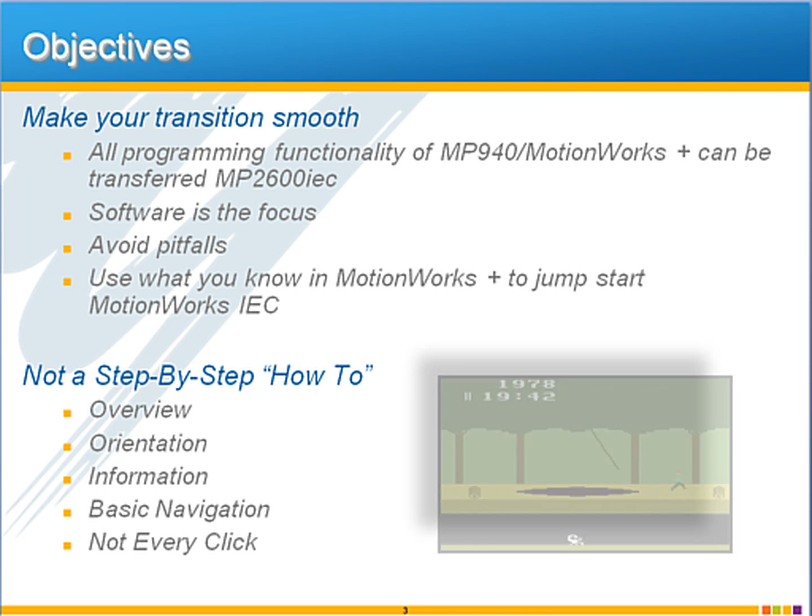So it's my goal in this e-learning video to bring these topics to your attention so that you, as the OEM or end user especially, can quickly come up to speed on Yaskawa's new IEC controller platform. What I want to do is help you avoid the pitfalls and alert you of some of the programming differences and details. And I want to help you use what you already know about MotionWorks Plus and the MP940 to give you a head start with the IEC platform.

One thing you'll see that this e-learning video is not intended to be is a step-by-step how-to video like many of our other ELVs are. We want this to be an overview of the topics, giving you simply an orientation to the specific areas of attention when converting from MP940 to MP2600 IEC. So I hope that you find it informative, and I will be showing some basic navigation but not explaining every single click.

Now, before diving into the material, I would like to just outline the sections of this training, which you can also see reflected in the navigation panel at the left. I'll cover some general programming concepts, followed by configuration, homing, indexing, camming, and networking. And I'm not going to take the time to cover every single property of every single MotionWorks Plus block, as really this e-learning video is not intended to be an exhaustive reference. I will instead use examples in each of these sections to illustrate the major concepts.

So let's begin. A general comparison of the programming concept I think is a good place to start. You'll see that there are many similarities and several differences in the instruction set, the programming method, variables, system variables, startup tasks, programs, and subroutines.

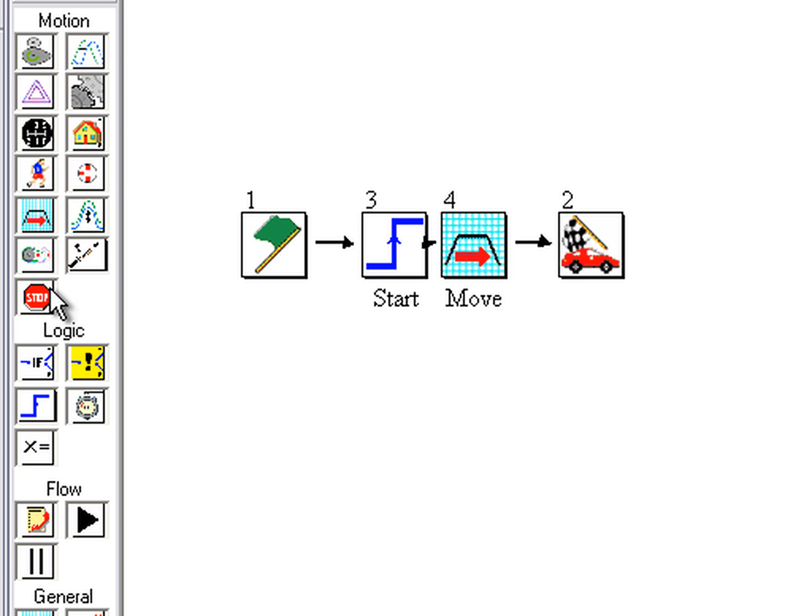First, let's look at the instruction set. Your programming tools are generally the same in both environments. Here in the MP940, you have your list of commands, and of course each of those have their properties. And in MotionWorks IEC, you also have the list of commands. The difference is that in MotionWorks Plus, this set of commands is specific for Yaskawa, but in MotionWorks IEC, the instruction set follows the international programming standard of IEC 61131 and PLC Open.

And part of this standard is that we don't have the properties as you'd have in different blocks in MotionWorks Plus with the properties area. Instead, you have the inputs as the properties, basically visible right on the block itself. The blocks in MotionWorks Plus typically have one input and one output, sometimes two outputs. And the equivalent for that in MotionWorks IEC is the execute and done input. You'll pretty much always see an execute in most of the blocks. Block calculations, status, and diagnostic information is also given in these outputs of the block.

As the program runs, you can monitor the state of both the inputs and outputs right on the code page, and you don't have to have a separate monitoring program and monitor it by block number as you did with the MotionWorks Plus environment.

In MotionWorks Plus, you'd connect the blocks in the sequence that you wanted them to run. The same is true with IEC, but IEC gives you a lot more flexibility. You don't have to connect the blocks together to sequence them, as they'll also be executed on the page from top to bottom and left to right.

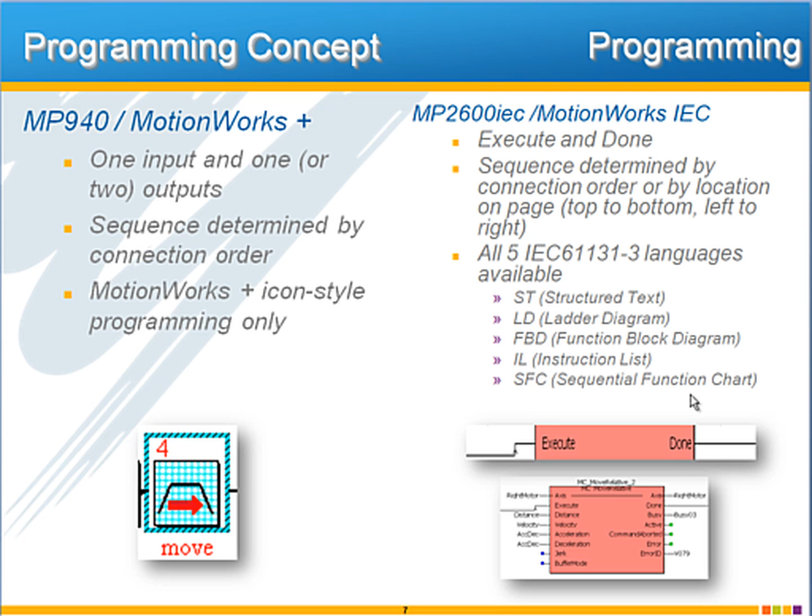In MotionWorks Plus, did you ever have to make a complex network of if blocks in order to accomplish what you know you could have done in ladder with just a few rungs? Well, in MotionWorks IEC, you can combine the best attributes of all of the major types of programming languages. You can use ladder, function blocks, structured text, instruction list, and even sequential function chart, which is like a top-level flowchart language. In all, there are 5 programming languages available, and you as the programmer can choose which language to use for each program worksheet.

Variables are another area where the MP2600iec expands functionality. In MotionWorks Plus, every variable you made was a global variable, but the MP2600iec supports both global and local. If you're creating a function block, you can also have input and output variables. Global variables mean that once you name a variable, that name refers to the same variable everywhere in the entire project. This may be the way you want the variables to work, but it is a programming limitation.

Here's an example. Let's say you want to reuse a section of your program, and it should run independently of the original. With global variables, you would copy, paste, and then have to manually go in and change all the variable names, which can make it very difficult then to reuse your code.

When you have local variables, you copy the code and the variables from one program page to another, and the variables retain their names, but still operate independently. There's then no name changing required. This is one of the major goals of IEC programming, which is code reusability.

Additionally, when defining a variable in MotionWorks Plus, you may remember that you had the 4 data type selections: bit, integer, long, and float. Now the IEC standard has these as well, just uses slightly different names here: bool, int, dint for double integer, and real.

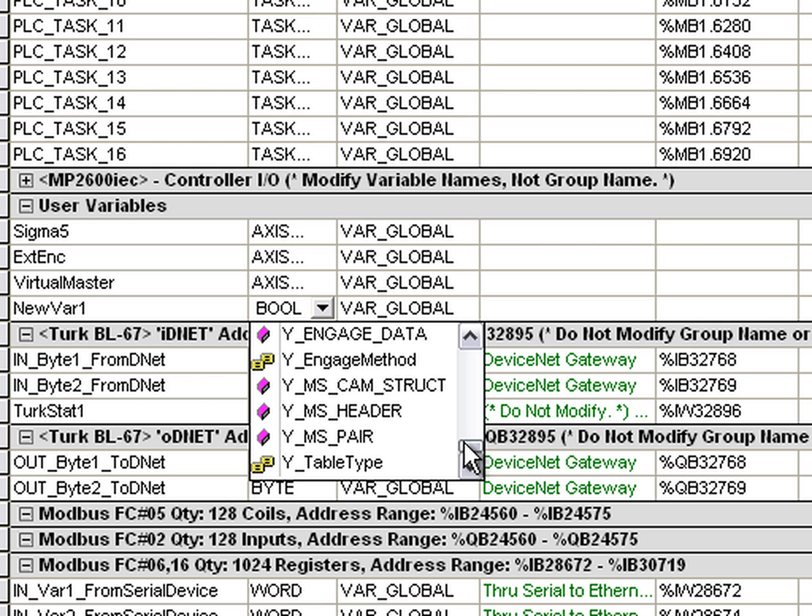You can see that here in a variable list. If you look at your variable list, there's also a type, and the list goes on and on. Very many data types, which is one of the hallmarks of IEC 61131-3, and we call it strong data typing. It really just means that variables of different data types will then not mix unless the programmer converts them to the same data type.

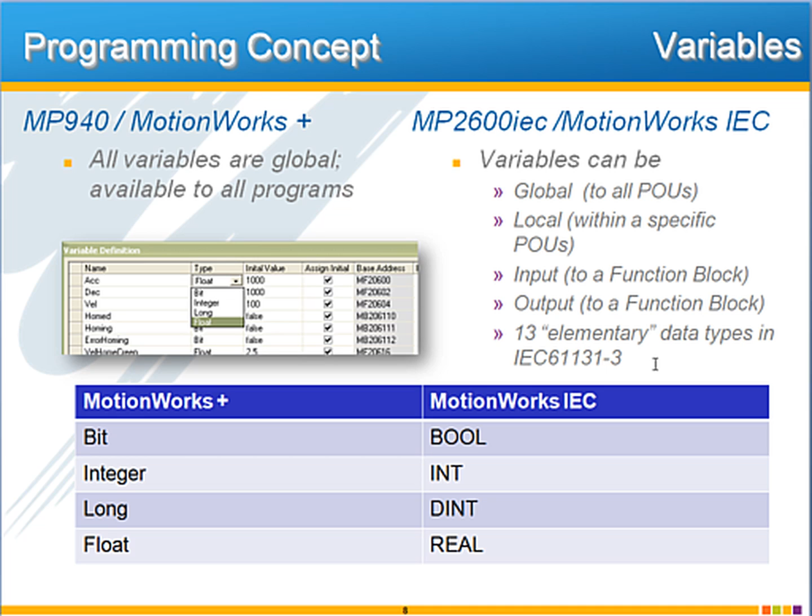There are 13 elementary data types, and you can make your own data types, which is how you create structures, arrays, or enumerated types. Continuing on with variables, let's discuss the MP940 system variables.

These are prefixed with the S for setting, and if you look down here, some of them are M for monitoring, and contain a lot of important different information such as error levels and feedback data. The MP2600iec employs this same concept, but instead we use the PLC Open term parameters instead of system variables, and each parameter then has a number associated with it.

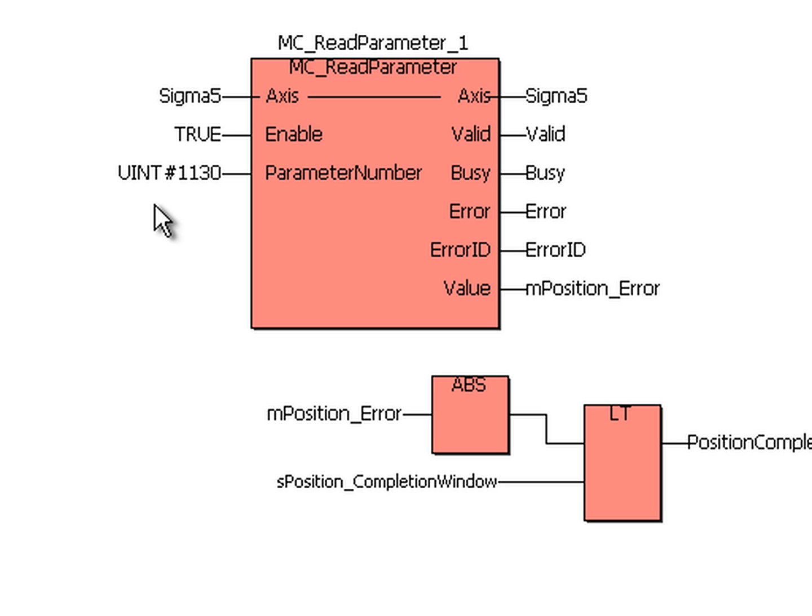So to use this information in your code, you use this block called MC read parameter or write parameter to set. That's how you would deal with this type of important system information.

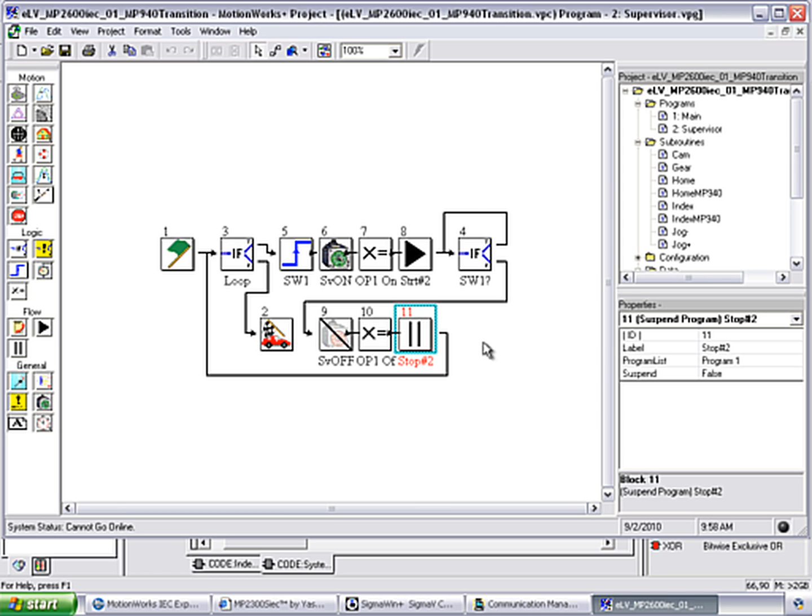Now that we've discussed programming, let's look at how the programs run in the hardware. In the MP940, each program has an auto start property. Then typically the programs with the auto start would stop and start other programs in the code using the play and pause icons. Now this fundamental concept is different in the MP2600iec.

Now that doesn't mean that you have to run every block of every part of the code all the time. It just means that you can use conditions such as if and jump statements to make different variables true and false at different times so that the blocks run when they're supposed to.

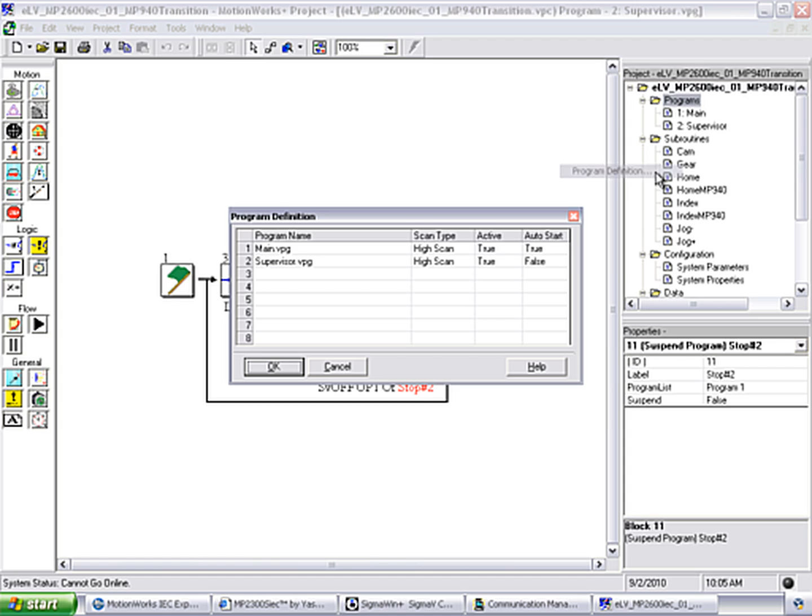And there's really more to the story of controller architecture, which has to do with the tasks in which the programs run and are executed by the controller. In MotionWorks Plus, each program scan type is assigned to either high scan or low scan.

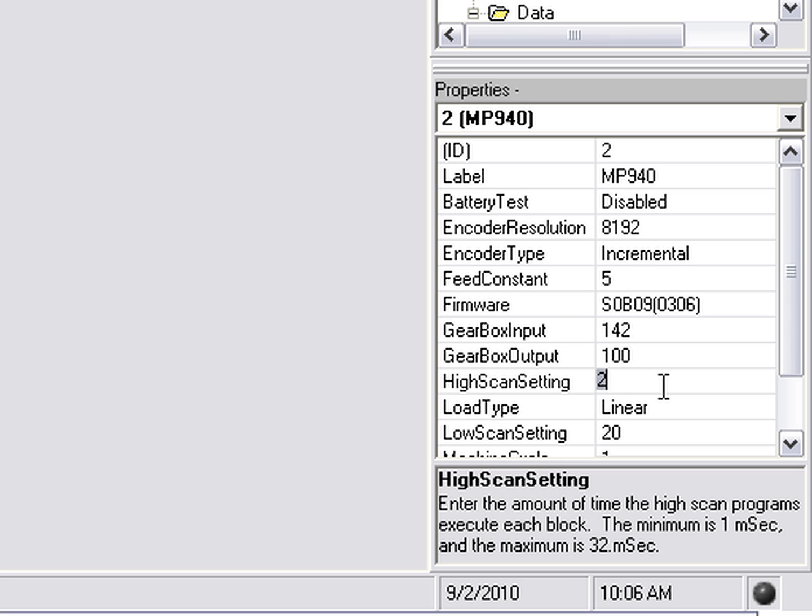These are the only two tasks available in the MP940, low scan and high scan, and the task update rate is set here in the system properties. But the MP2600 IEC follows the IEC 61131-3 definition, which is more powerful and flexible.

This allows up to 16 tasks using the Pro version, as I've got here. I don't have 16, I have 6 tasks at this point. Each program is assigned to a specific task in the hardware tree, and you can have different update rates for each task. This one's 100 milliseconds, this one is 80 milliseconds, this one is 50 milliseconds.

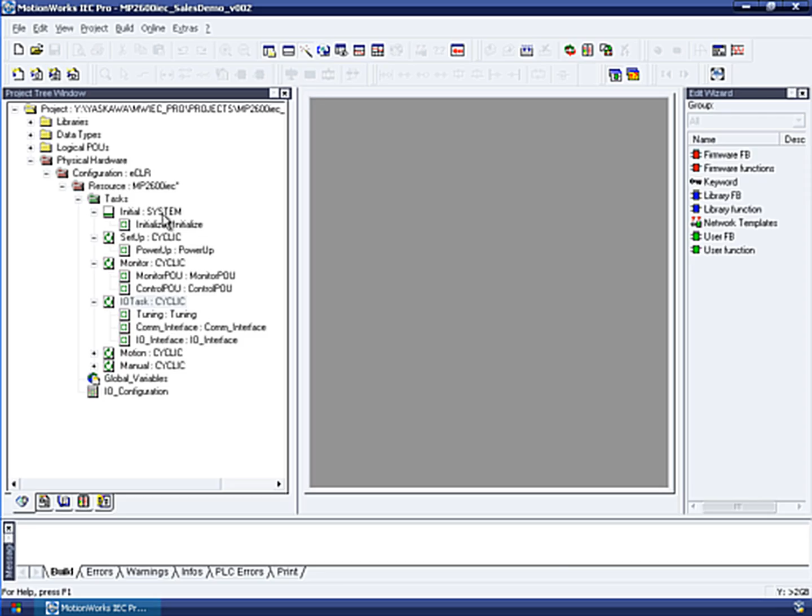So very similar here to the high scan and low scan, but you have basically high, low, and everything in between. This model also allows for special tasks that run just once, like this initial system task, which is set in this case to warm start, basically a power up, so that you can have system data initialized right when the controller turns on.

We have a lot more information about MotionWorks IEC Pro and task assignment and how to do all that in the MotionWorks IEC Pro e-learning module available on our website.

So as the programs are running, each in their tasks, what if there's another code page that needs to be executed at that time? This in MotionWorks Plus is called the subroutine. Subroutines are basically just program pages that run only when called by another program or another subroutine. In the MP940, you have to be sure, as we've done here, to call them only one at a time. Basically a subroutine is a way to organize your code from one page into another so that you don't have all of your code on one huge page.

You would never call the same subroutine more than once, since the data would become corrupt. This is because subroutines work with all of the data, all of the global variables, with all of the current values.

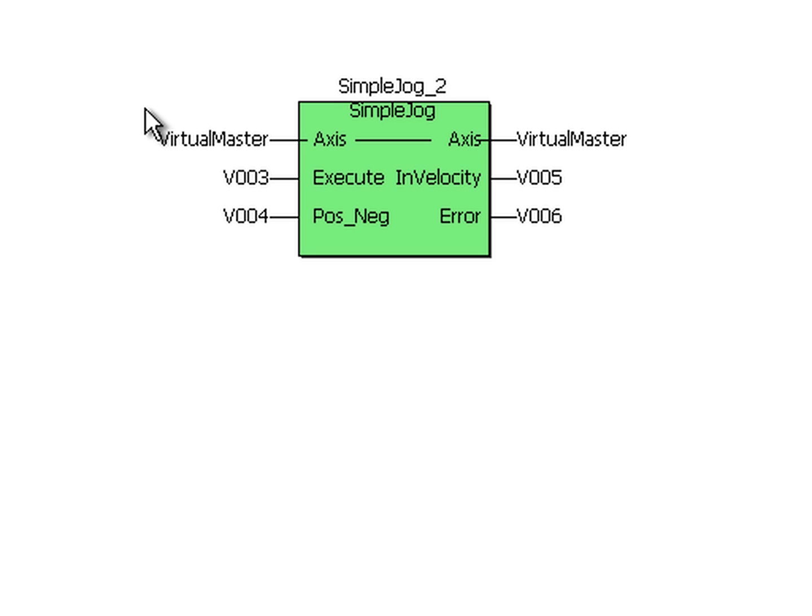In the MP2600 IEC, we don't use subroutines, instead we use function blocks. Remember, all of the program POUs are running all the time anyway. So when there's a specific page of code to run at a specific time, here I've got this function block called simple jog. I can double click on it and inside you see the code for it.

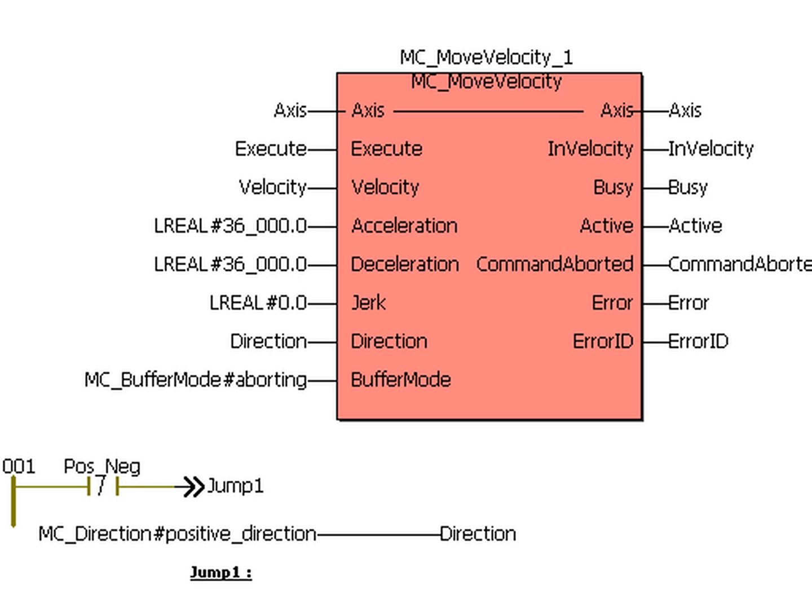One nice thing about function blocks is that you can execute them simultaneously by any of the program POUs that are running, because they don't share the same data space like the subroutine does. This is one of the most powerful features of the IEC programming platform, the ability to make function blocks based on function blocks to higher and higher programming levels.

This allows you to reuse your code without having to go through and rename variables and make other code changes. So as an example here, I can add this function block that I made called simple jog over and over again without worrying about calling it more than once like a subroutine.

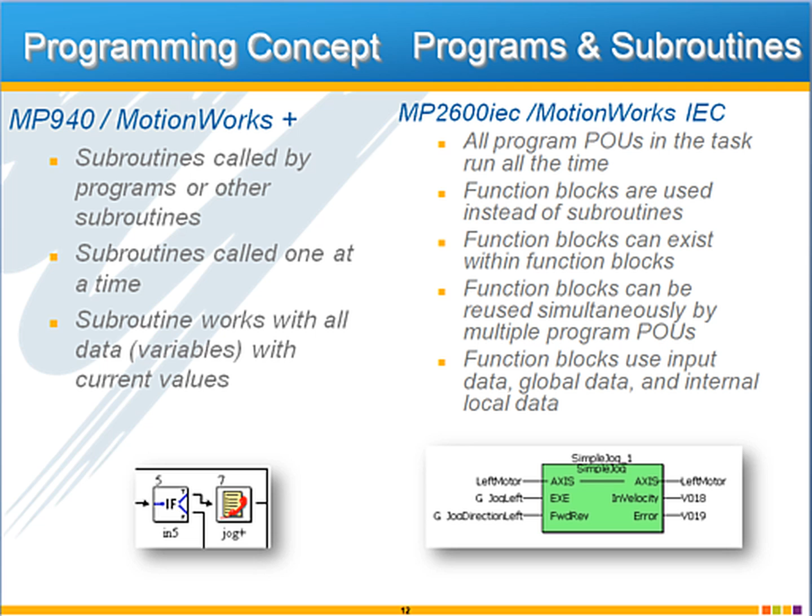That's exactly why they give different titles at the very top, 1, 2, and 3. The point is, once you have made a working function block, you just keep plopping it down wherever you need it in your program as if it were any other instruction, and the function blocks that you make in one project are very easily accessible by another project, so there's really no reworking what's already been done.

Now that you've seen some of the general differences, let's look more specifically at the configuration. Configuration means the hardware settings, such as user units, servo parameters, and network devices. This configuration is likely to be for you the first area to consider when you're converting an MP940 MotionWorks Plus application over to MP2600 IEC.

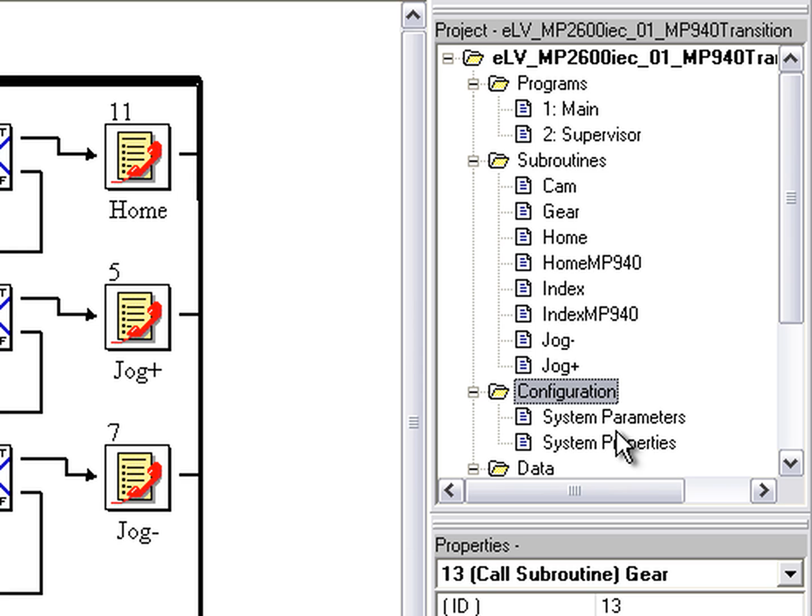The MP940 project contains the configuration folder with the system parameters and system properties. Let me just remind you where that is: the configuration folder, system parameters, and system properties. I'll start with the most basic of these, the system properties. The equivalent of the system properties in the MP2600 IEC is the hardware configuration.

That's this MWCT button. Now this MotionWorks IEC hardware configuration is a separate window where you define basically all the same information that you would have seen in MotionWorks Plus system properties. The basic navigation difference was that in MotionWorks Plus we had different buttons, each with their properties. In the bottom right, we use a more modern tree structure here at the left for the different devices in MotionWorks IEC.

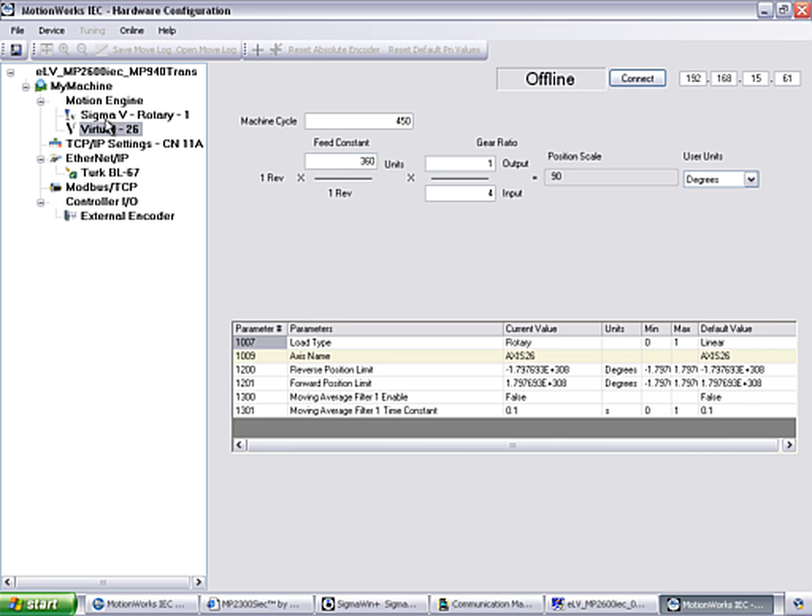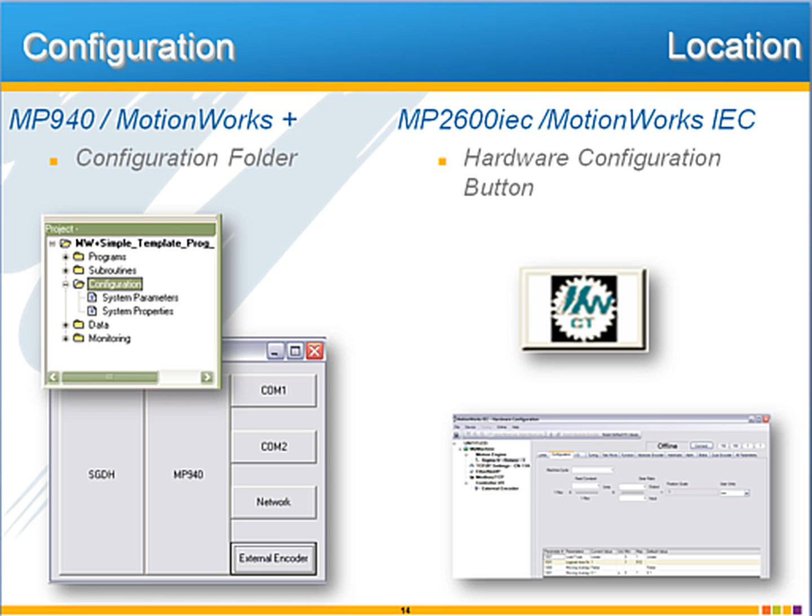So let me take some time now to look at each of these different sections and relate them from MotionWorks Plus over to MotionWorks IEC, and hopefully help you avoid any pitfalls.

So the first area is the SGDH, or the Servo Pack System Properties. This is where you have all of the parameters of the drive, the Servo Pack, listed numerically. The equivalent of this in MotionWorks IEC is the Sigma V, and then go to the All Parameters tab at the far right, and you'll see all of the same types of parameters.

Now, many of these SGDH parameters correspond between Sigma 2 and Sigma 5 used in MP2600 IEC, but the most critical ones for your application are going to be the tuning-related parameters. For tuning-related parameters, it makes the most sense, since you have Sigma 5, to use the advanced features of the Sigma 5. Don't just try to transfer those tuning parameters over. You're probably not going to get a very good result.

Now, if you did have a lot of different servo parameter settings in the MP940 system, or you're just not sure, you want to be very sure that you didn't have any other things like torque limits or other settings, and you want to see what they are, you might want to try using the Sigma Win Plus parameter converter.

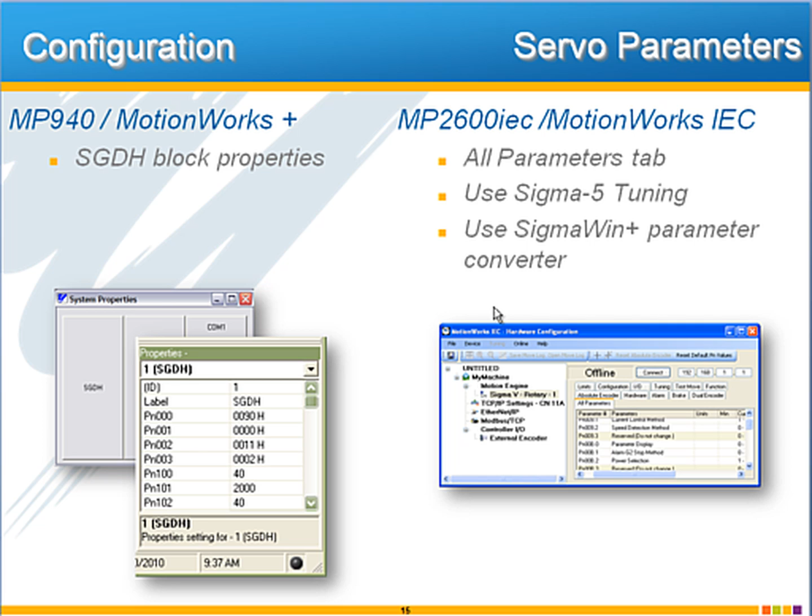So basically what you do with Sigma Win Plus is connect the serial cable to the SGDH, pull out the parameters, save them to a file, and then under this parameter converter menu, you can go find that file. I've got a sample one here, and give it something to save it as. Hit convert, and then it will show you parameter by parameter the conversion and give you a little key here for which ones are different, which ones don't apply, by the color key here.

So you can look at those one by one and decide if you really need to address that parameter, what that parameter is. There's probably going to be many parameters that haven't been changed and that you don't need to worry about, or tuning parameters that you should not try to convert from Sigma 2 to Sigma 5.

Moving on now to the MP940 properties in MotionWorks Plus. That consisted mainly of the mechanical system definition so that you could program the natural units or user units.

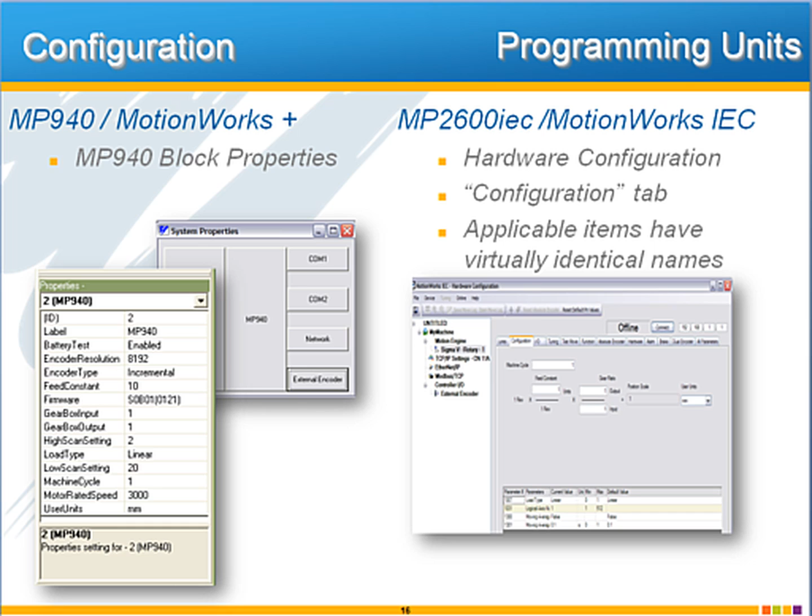MotionWorks IEC uses the hardware configuration tab. So here in the configuration tab, you'll find the exact same machine cycle, feed constant, gear ratio, user units, load type. And our development team has tried to be sure that we named these the same as they were in the MP940 with MotionWorks Plus.

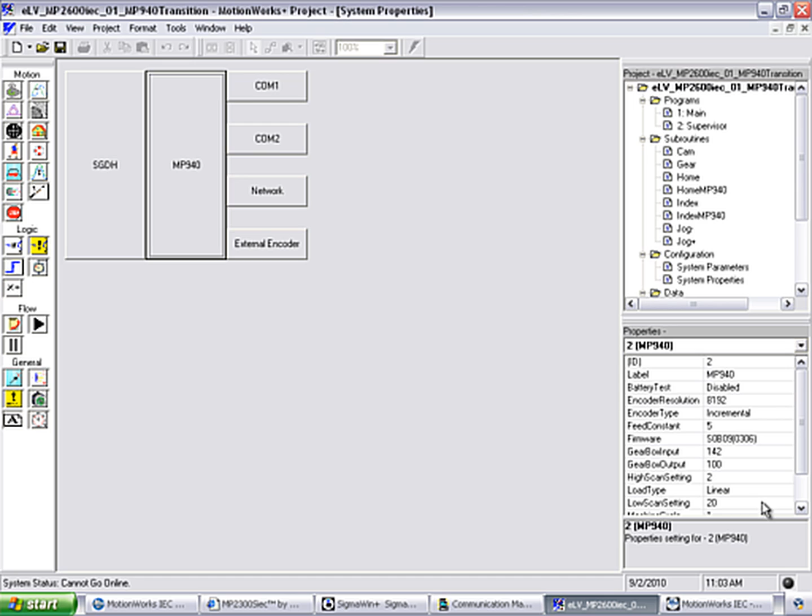So all of these same names basically port directly over, and you can use the same values in the MP2600 IEC project as you had in the MP940.

Now, you will find fewer fields. For example, you're not going to have the encoder resolution, since now in Sigma 5 with the MP2600 IEC we can detect that automatically. But all the rest of them, if you find it in MotionWorks Plus, you can plop it right here into the configuration tab of the Sigma V axis under Motion Engine.

If your MP940 application relied on the serial port, the DeviceNet port, or the Mechatrolink port, then there's going to be some engineering required in this area in order to transition to the MP2600iec. Remember that the MP2600iec exclusively uses the Ethernet port for all of its network communication.

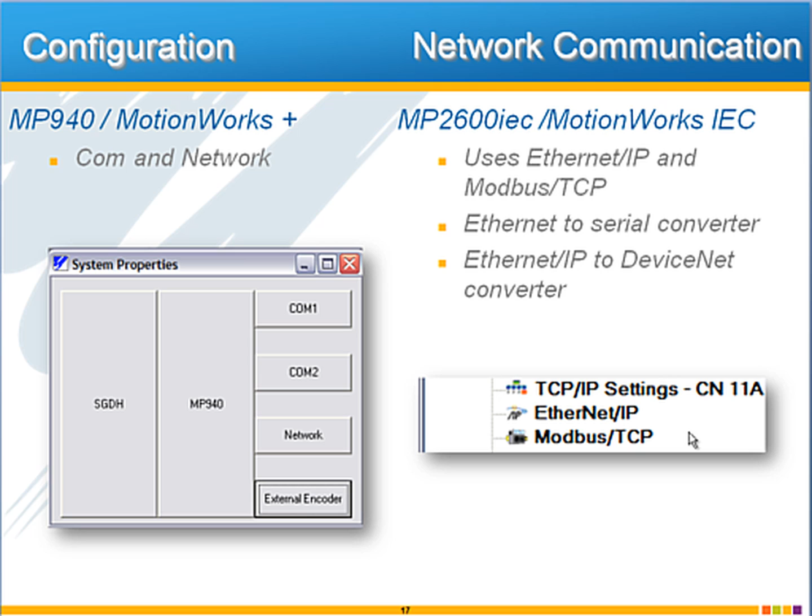So if you can upgrade your network devices to use either Ethernet IP or Modbus TCP or even the OPC protocol, that would be the best option. But if it's not an option, there are third-party conversion devices available, and I'm going to have more on this in the networking section of the e-learning video.

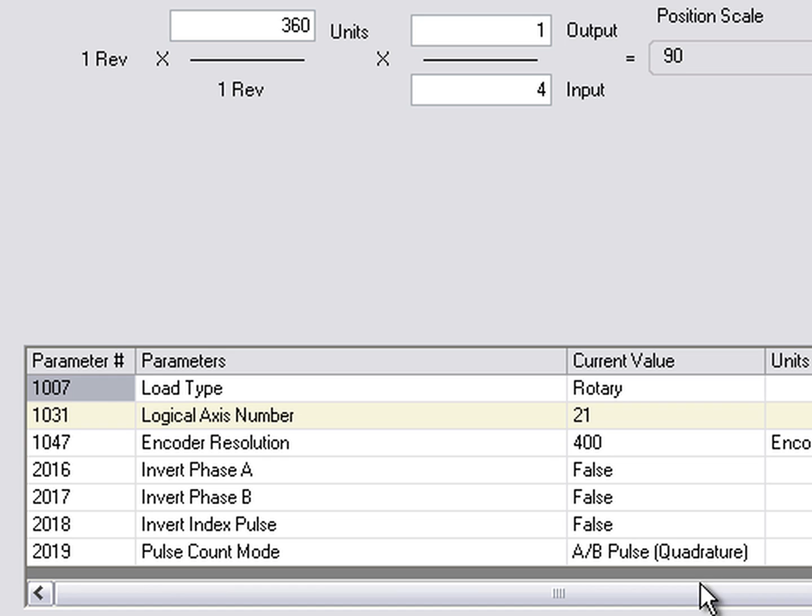The final area in the MotionWorks Plus configuration is the external encoder. MotionWorks IEC basically shows that same information under the external encoder in the hardware tree. So here I go down to controller I/O, external encoder, and you'll see the same type of terms: machine cycle, feed constant, user units, gear ratio, load type. Again, word for word identical to the MotionWorks Plus area under external encoder properties.

The other really important part of the MP940 with MotionWorks Plus configuration was the system parameters. These were just very few, consisting of servo loop gains and limits.

The MP2600iec does have tuning gains, but remember, tuning is not usually required thanks to the advanced Sigma 5 tuningless mode. If you do need to fine-tune the motor, don't transfer the tuning values over, and don't try to set the tuning values manually. Instead, connect SigmaWin Plus and use the auto-tuning sequence on your Sigma 5. So don't use the P gains, don't try to transfer those over to the MP2600iec project.

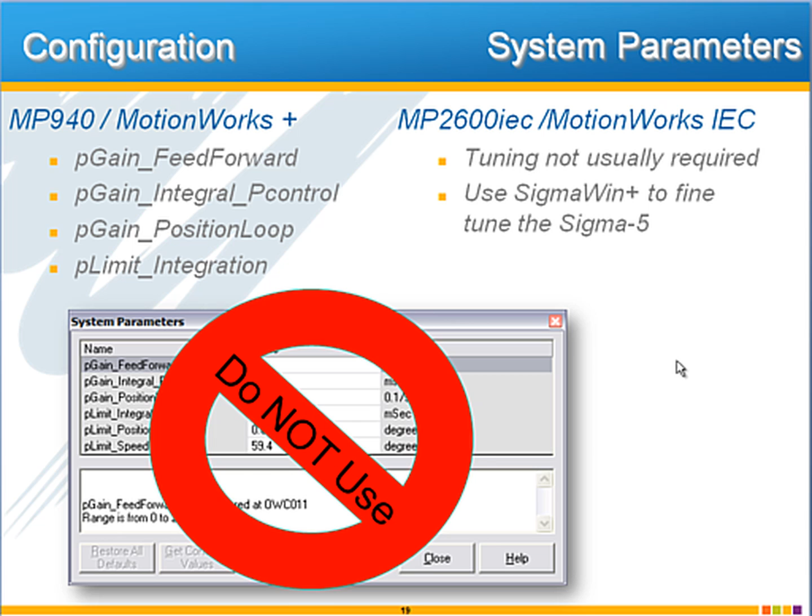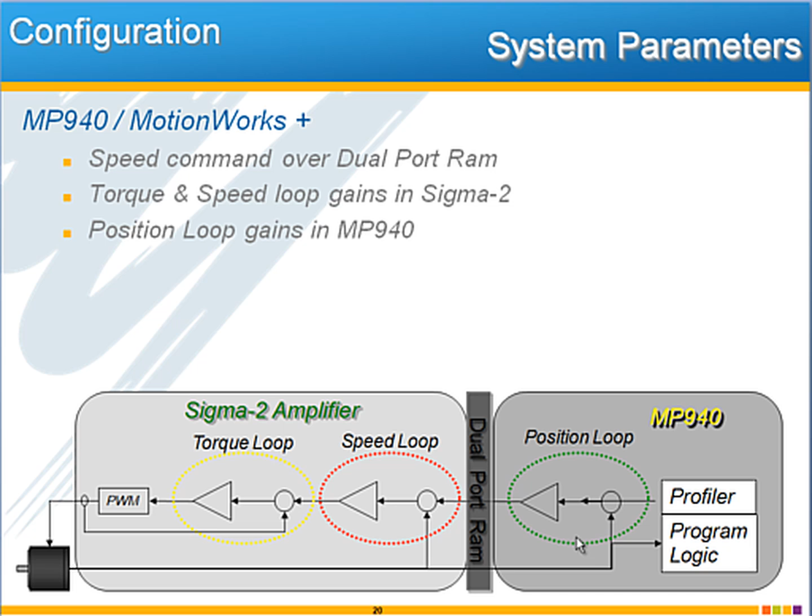This brings up another really important difference in the way these two controllers interface to the amplifier. The MP940 operates by sending a digital speed command over the dual port RAM connection, which means that while the Sigma 2 closes the torque loop and the speed loop, the position loop physically resides in the controller card.

That's why the MP940 controller system had those parameters for position loop proportional, integral, and feed-forward gains. The MP2600iec instead commands position straight from the profiler over dual port RAM into the position loop of the amplifier, so you can see all of the gains physically reside in the amplifier for torque, speed, and position.

What this means is that you can take full advantage of all of those Sigma 5 powerful tuning options. The tuningless mode, advanced auto-tuning, vibration suppression, anti-resonance, all of these are now available when using the MP2600iec. This also means that there are no gains at all in the option card. The profiler position just comes out to the Sigma 5 amplifier, and Sigma 5 takes care of the rest.

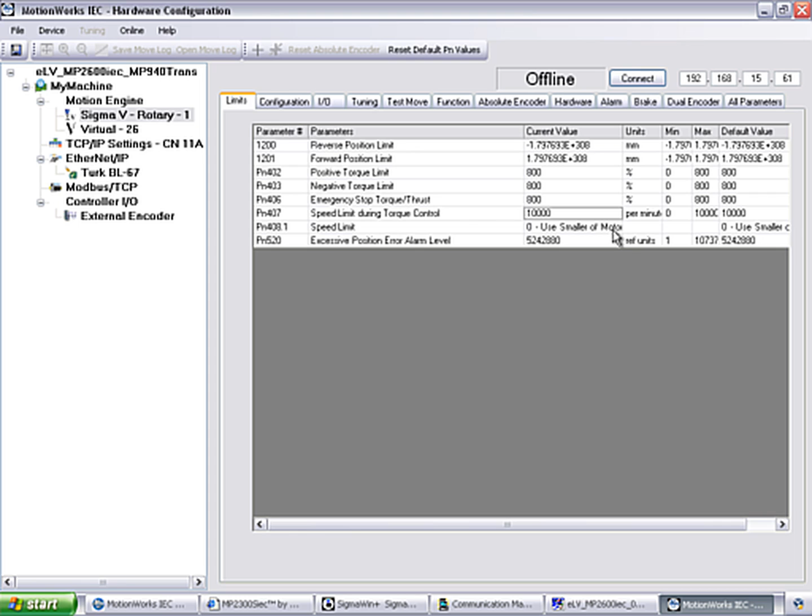Just to finish off the system parameters, there are a couple here: P-limit positioning error and P-limit speed, which aren't exactly tuning related. We do have the equivalent parameter settings in the MP2600 under the Limits tab. So here in the hardware configuration, under your limits, when you set these, please pay close attention to the setting units, because they're not going to be the same as in MotionWorks Plus. Here you've got PN520, the excessive position error alarm level, and PN407, the speed limit during torque control. These are the equivalents in MotionWorks IEC compared to MotionWorks Plus.

Configuration differences in these two platforms affect some fundamentals of the programming concept. The blocks in MotionWorks Plus, with few exceptions, apply only to the main servo axis of the system, the Sigma 2 motor. Gearing and camming in MotionWorks Plus assumed that the external encoder was the master, and the virtual master could be selected with the system variable S external mode, and this virtual master had very little control. Only the acceleration and the speed could be set.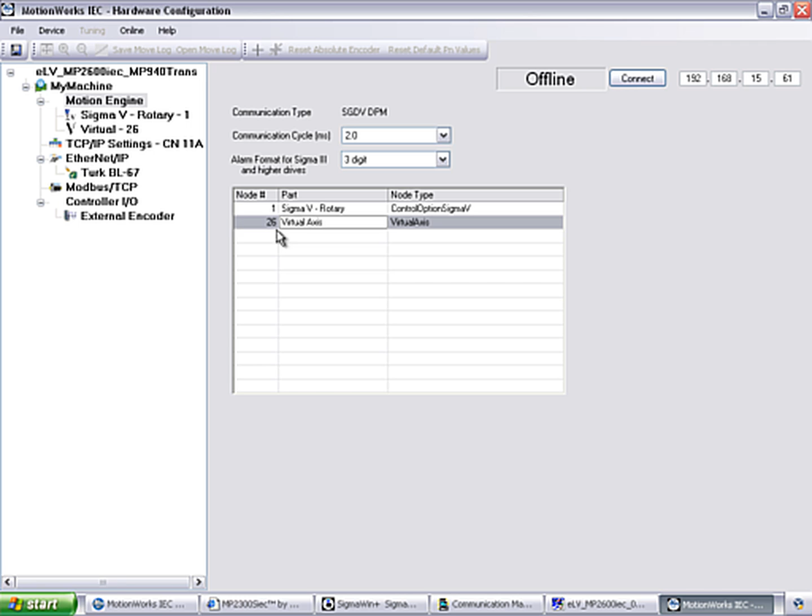In the MP2600iec, the external encoder and virtual master are configured as axes in the system. You can see these here. The motion engine shows the different axes of the system. You have the rotary axis, the virtual axis is another axis, and there's also the external encoder, which exists as another axis. So to differentiate between the different axes, you include an axis number, even on this single axis controller.

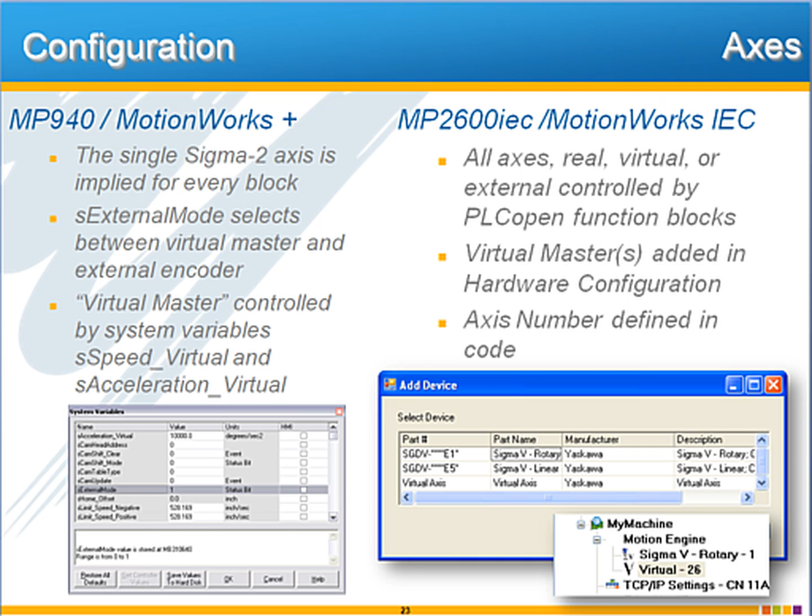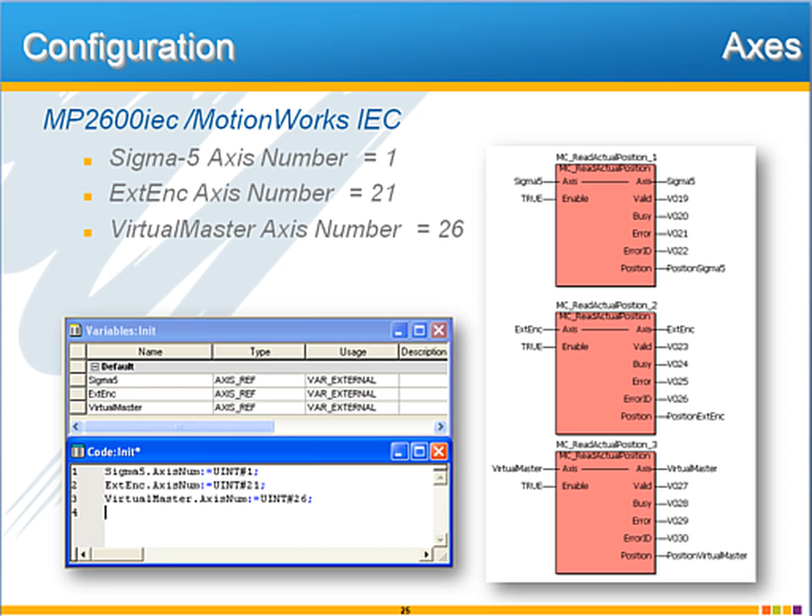This axis number is referred to using a variable with a structure data type called axisRef, just like we show in the Quick Start video. So here, like in the Quick Start video, I've created a separate text program and I define the axis with its corresponding axis number. Typically it will be as in this example: the Sigma 5 is axis 1, the external encoder is axis 21, and the virtual masters are 26 and above if you have more than one.

Once that's set up, you can basically forget about the numbers and just connect the variables: Sigma 5, external encoder, virtual master. For this example, I'm reading the actual position of the Sigma 5 axis, the external encoder axis reading the actual position, and the virtual master reading the actual position.

Homing routines can be as varied as the machines themselves. So I want to compare the homing blocks available in these two systems and then present a simple example of homing to a sensor.

MotionWorks Plus has one type of pre-designed homing available through the home block. The home block moves the axis until a bit, such as an input or other condition, is satisfied, and then continues to move the motor to the index pulse of the encoder. Setting the final position is done through a separate block. If your MP940 based machine required any other type of homing, such as homing to a sensor only, or homing to over-travel sensors, then you would have constructed that customized homing routine block by block.

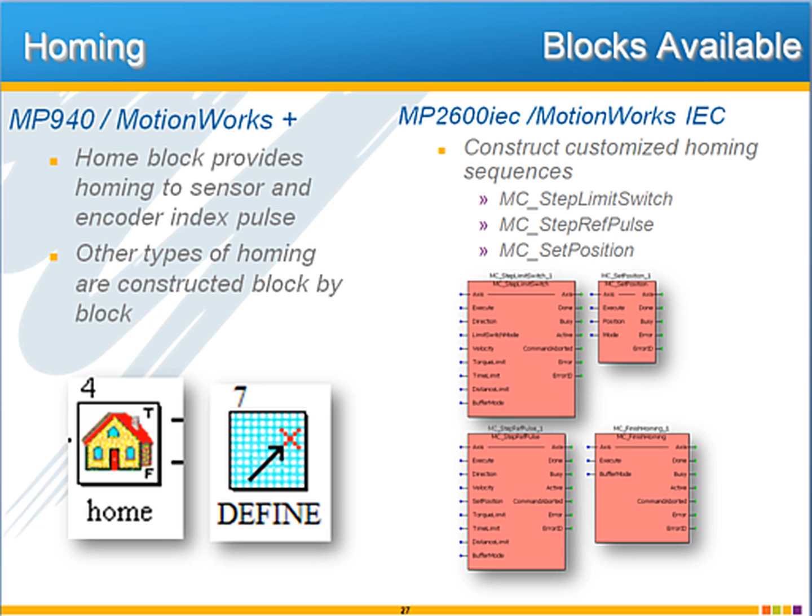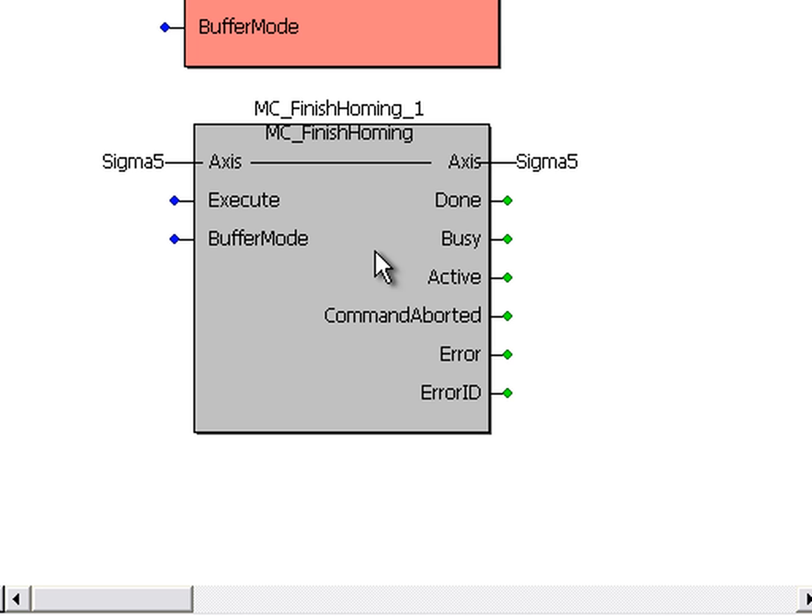This block by block concept is the technique employed by the MotionWorks IEC environment. In order to build your custom homing routine, Yaskawa has two of the most critical PLC Open homing blocks, which start with MC step: MC step limit switch, MC step ref pulse. These can be found in the PLC Open Plus area as MC step limit switch, step ref pulse, and there's also a set position, which corresponds with the define block of MotionWorks Plus. There's also one more here called MC finish homing, which may be used to leave homing mode.

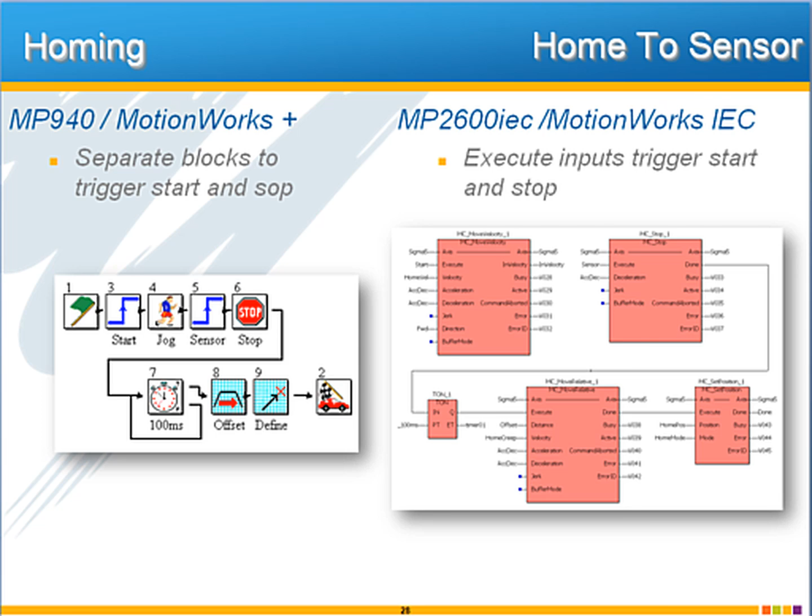In my example, however, I'm not going to use the MC step blocks. I just need a simple home to sensor. So let's look at it in MotionWorks Plus first. In this example, I have an input that will start the motor jogging, and then another input which is tied to a sensor to stop the motor from jogging. There is then a timer to wait 100 milliseconds before the motor moves an offset distance, and then we call that final position, position 0.

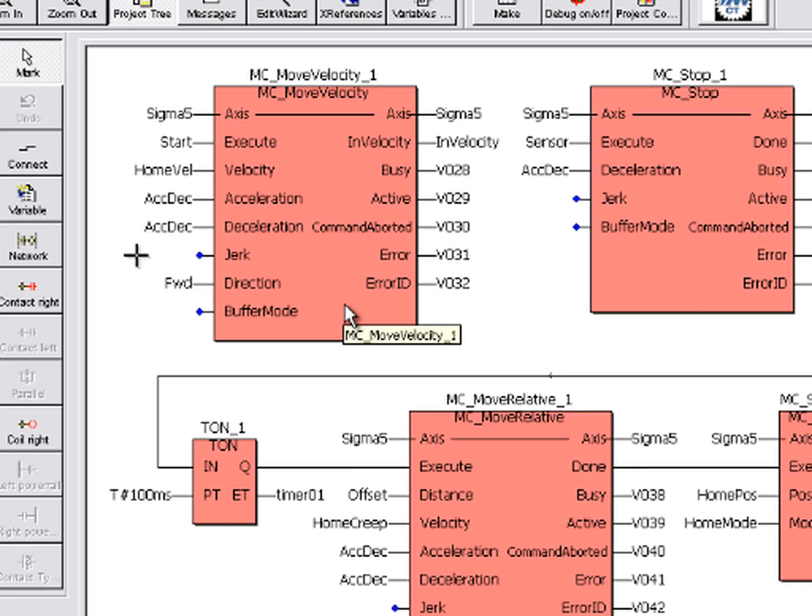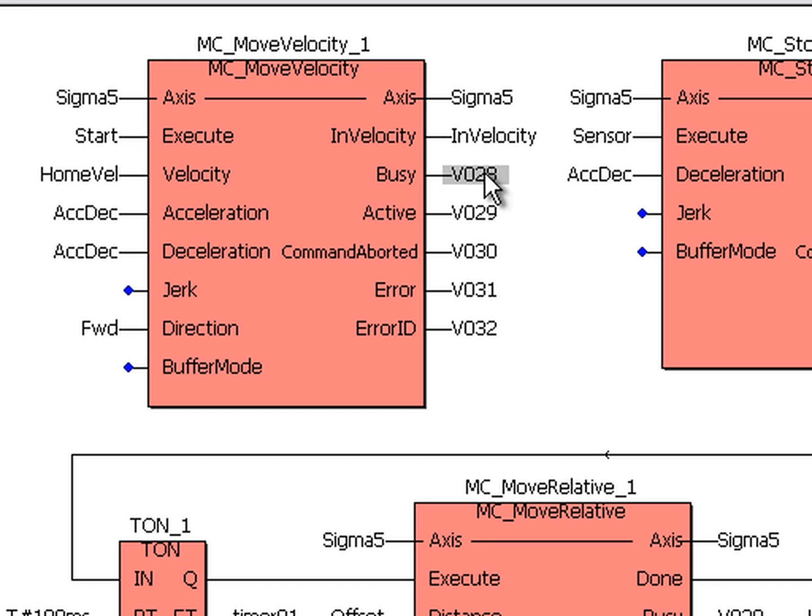In MotionWorks IEC, there's almost a block-for-block correlation between these two programs. The only difference is that the rising edge input to start, and then to stop based on the sensor, are found directly on the PLC Open blocks. It's also worth pointing out here that the timers use the time data type, so both literal and initial values use this syntax, T# 100 ms for milliseconds. As we mentioned before, you can see how the PLC Open blocks put other properties as inputs, such as the home velocity and the accel, decel, and direction, and additionally give the diagnostic information as outputs. So this is my example.

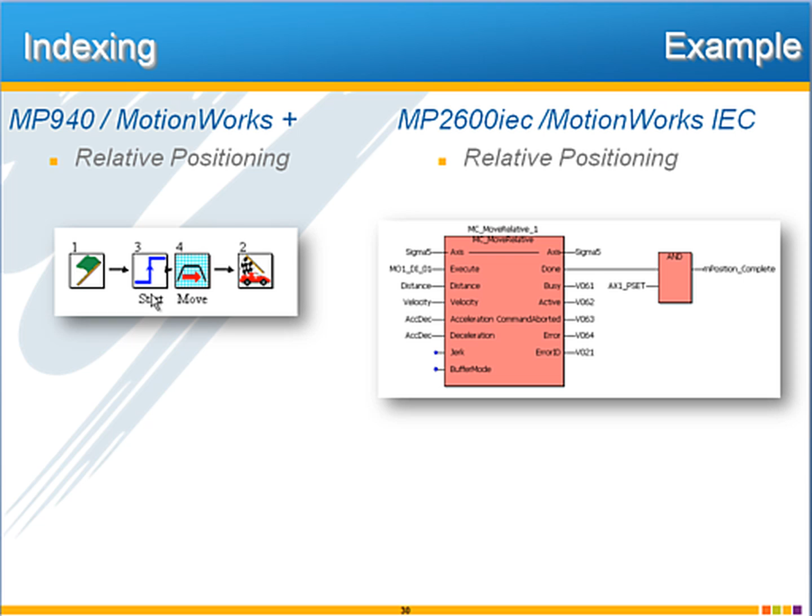Here's an example of probably the most simple indexing move possible in the MP940. Assuming the servo is on, an input triggers the move, and then the subroutine just waits until the motor's in position before it's done. MotionWorks Plus gives you a single move block, and then you choose in the properties the move type, whether absolute, relative, or rotary shortest.

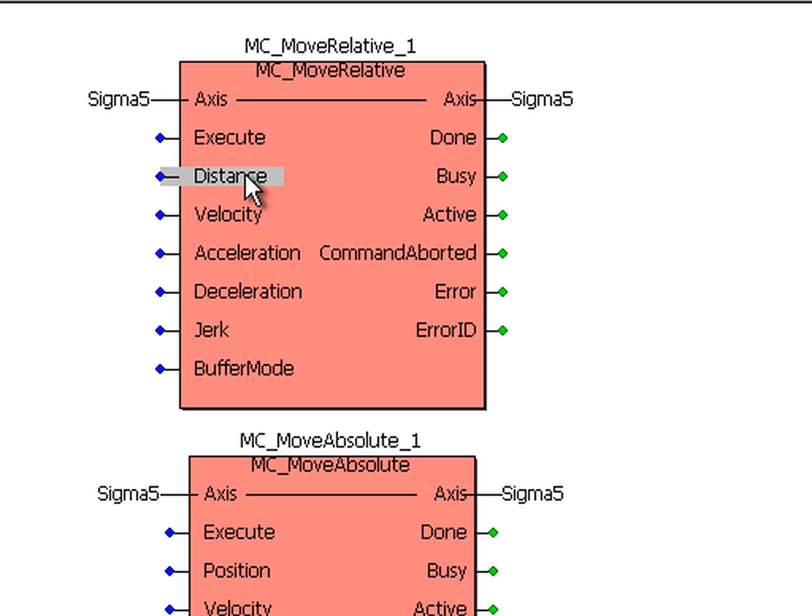In MotionWorks IEC, we have two separate blocks, one for relative and one for absolute. Notice that the absolute block uses the input position and the relative block uses the input distance. Also notice that it's only the absolute block that has the direction input.

So the concept is the same in both controllers. When the load type has been configured as rotary in your system properties in MotionWorks Plus, then you're able to choose rotary shortest, and this rotary system can then move to a specific position by moving either forward or reverse.

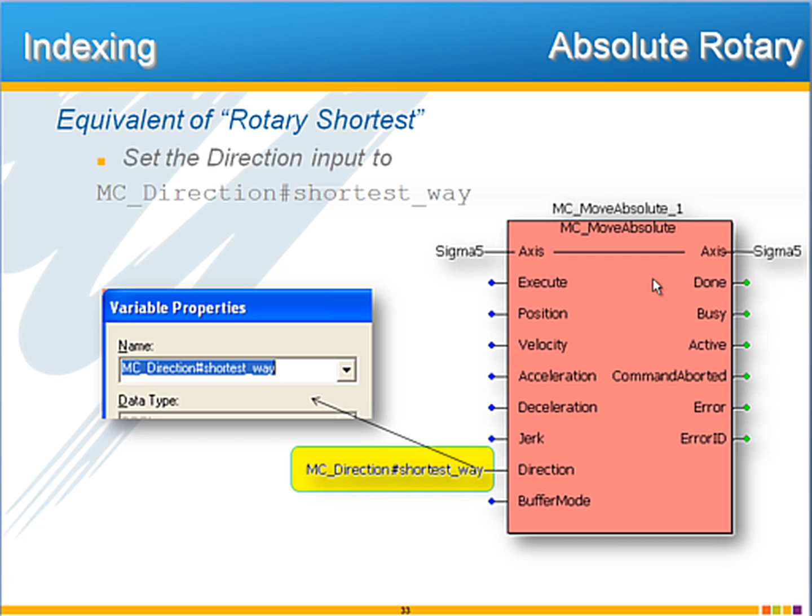The easiest way to apply the equivalent of MotionWorks Plus rotary shortest option in MotionWorks IEC with the move absolute is to type in MC_direction#shortest_way as the direction input. Let me show you how that works. So on the direction input, we type MC_direction#shortest_way.

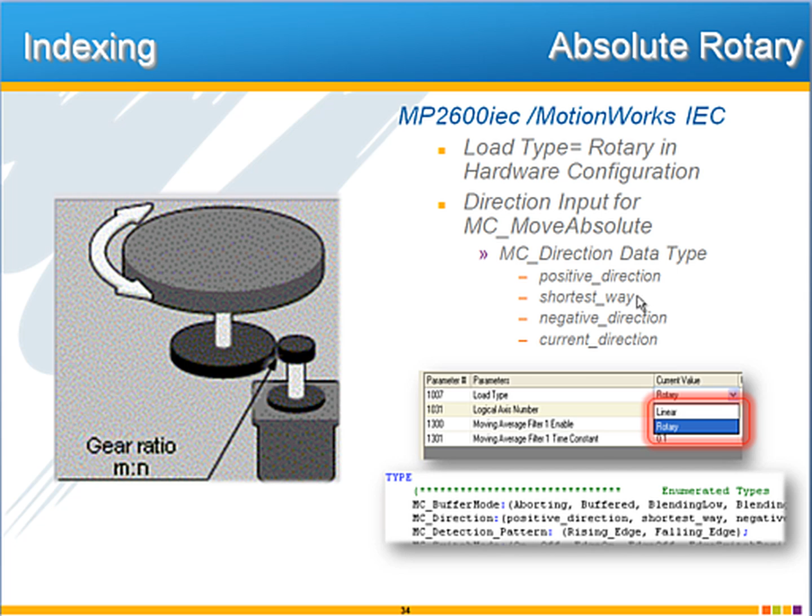In MotionWorks IEC, the direction input of MC_move absolute has four options, and one of them is shortest way. These four direction options are wrapped up into a data type called MC direction. You can see this in the data types folder by opening up motion block types, and you see right at the top your MC direction and all the different types of directions that are supported. You notice that there is one fourth direction that would be applicable to a rotary mode, which is the current direction. That was something that we did not have in MotionWorks Plus.

The other difference between the move blocks of MotionWorks Plus and MotionWorks IEC is what it means for the block to be complete or done.

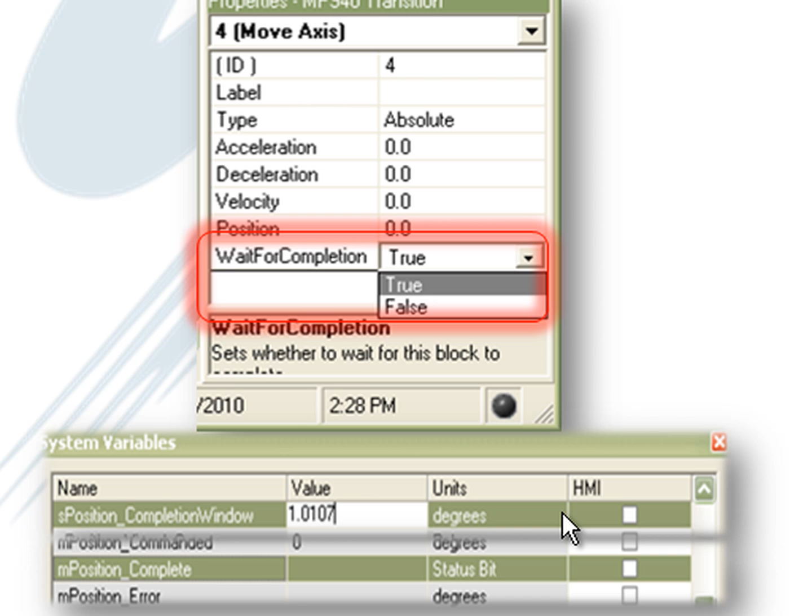As you remember, there's an option here, wait for completion, true or false, in MotionWorks Plus. What that means is wait for the motor to get to the final position within a certain completion window. You can also monitor that through the position complete bit. However, in MotionWorks IEC, MC move blocks are done as soon as the profile is complete.

This means the profiler just finished commanding the move, not that the motor is actually in position. So it's a little bit different, and I've illustrated that in this timing chart. It's a bit exaggerated, but it shows there's a difference between the commanded profile being done, as we'd use in MotionWorks IEC, and the actual profile. The motor is going to perhaps be a little bit behind, and the move would be complete at that time.

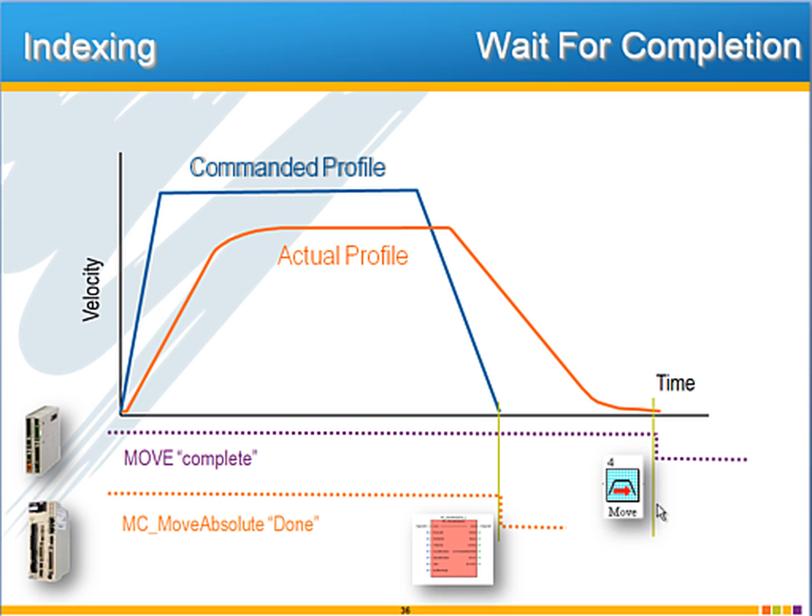Now, in many applications, the timing difference here is negligible, since the Sigma 5 follows the commanded profile so well, even without additional tuning. But when it's very critical to be sure that the motor has completely stopped moving and is truly in position, you're going to want to add some kind of complete functionality like we had in MotionWorks Plus. So here's one easy method to make the MC_move relative or absolute perform with position complete.

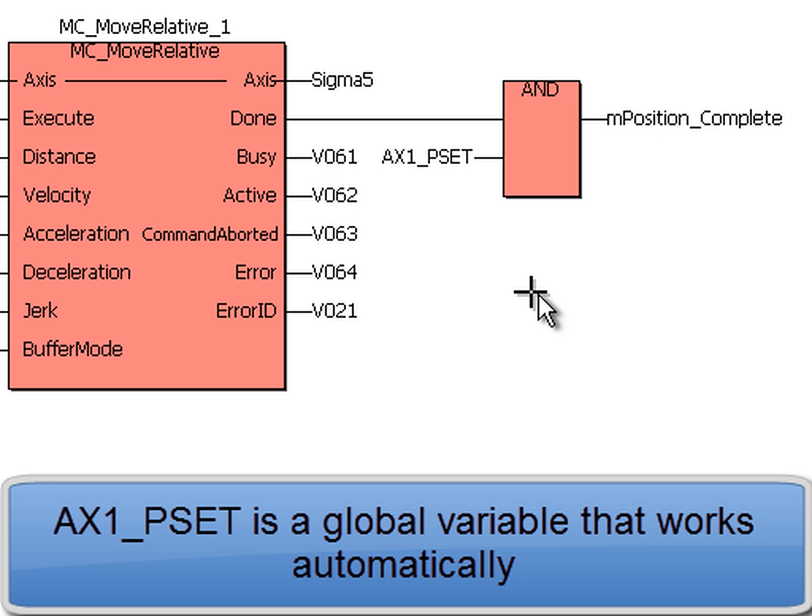Just like in MotionWorks Plus, you'll use the AX1_pset variable ANDed along with the done bit to create your position complete bit. So I've got that here in my code. AX1pset is a variable that becomes true when the position error falls below the level set in parameter PN522. Parameter PN522 can be found under the Sigma 5 All Parameters tab, 522 Position Completed Width. This bit, pset, can turn on even while the motor is moving, so that's why you want to AND it with the done bit in order to get your position complete.

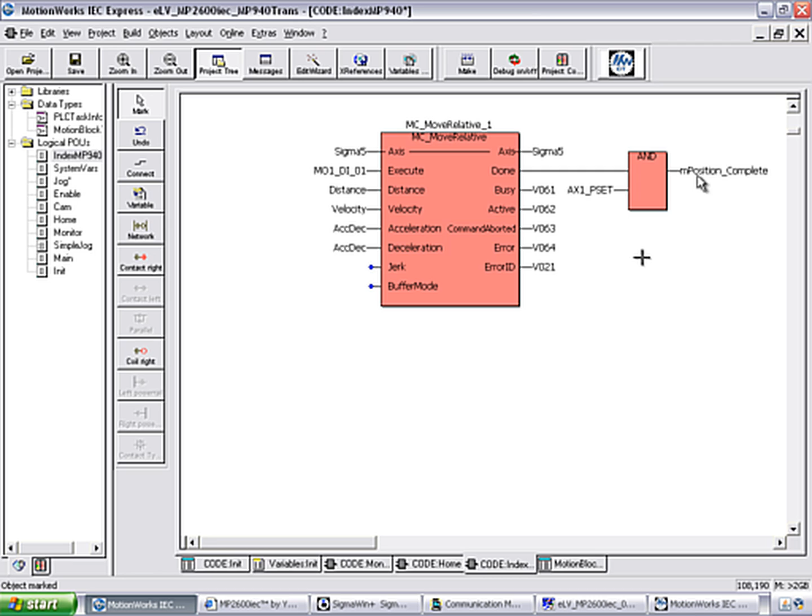This table summarizes the parameters required for wait for completion. Notice that the equivalent here, position completion window, was set in user units in the MP940, while PN522 we just showed was set in encoder counts, the post-quad encoder counts of the motor. Also in the MP940 we had M position complete, a bit that told you whether you were in position or not. With the MP2600 IEC, you have to AND together the AX1_PSET with the done output of the specific block that you are using it with.

Now, one problem that can arise when you're using position complete is that if your tuning is not good enough, or if this in-position completion window was set too low, your motor might never make it to the final position, and then the move would never be complete.

This is one of the benefits of using the PLC Open standard in MotionWorks IEC. Using this profile done is truly more flexible, because it allows the application programmer to add code for what in position means for that specific application. For example, maybe in position in your machine should latch once the motor crosses the finish line, actually gets specifically to the final position instead of just looking for an in-position window.

Or maybe the motor has to remain stable at your final end zone for a certain amount of time. Whatever the situation may be, you can build that and wrap it up into your own function block in order to develop a very machine-specific move block instead of just making do with predefined move complete as we have in MotionWorks Plus.

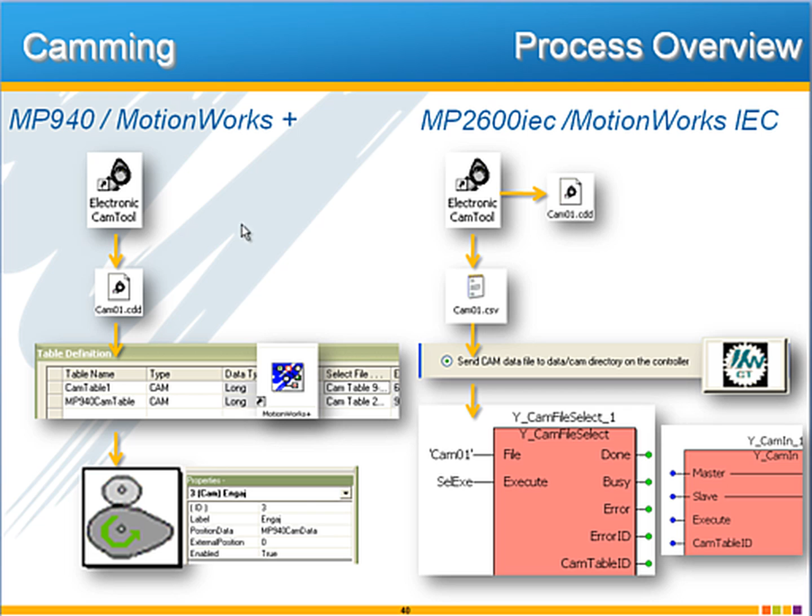So you can see in both cases there is a path for the CAM data to get from the CAM tool down to the controller and then to be used by the program. So the process is very similar for both systems, but there's more to it than just making a quick CSV file in CamTool.

This is because there's some differences in the way that units are handled when you are going from MotionWorks Plus to MotionWorks IEC. In MotionWorks Plus, the master unit in the CAM table could really be any value, and it would be then normalized to the machine cycle of the external encoder. And then the CAM table, the slave unit of the motor itself, could have been programmed in either encoder pulses or in the natural unit, the user unit of the machine. We often, for accuracy's sake, would recommend to use encoder pulses for the slave in the MP940.

But in MotionWorks IEC, we are going to be consistent here with the units. You set up your unit for the master, the external encoder, in the hardware configuration, and that is the unit used in the CAM table always. And then the slave also matches the servo's unit that's been set up.

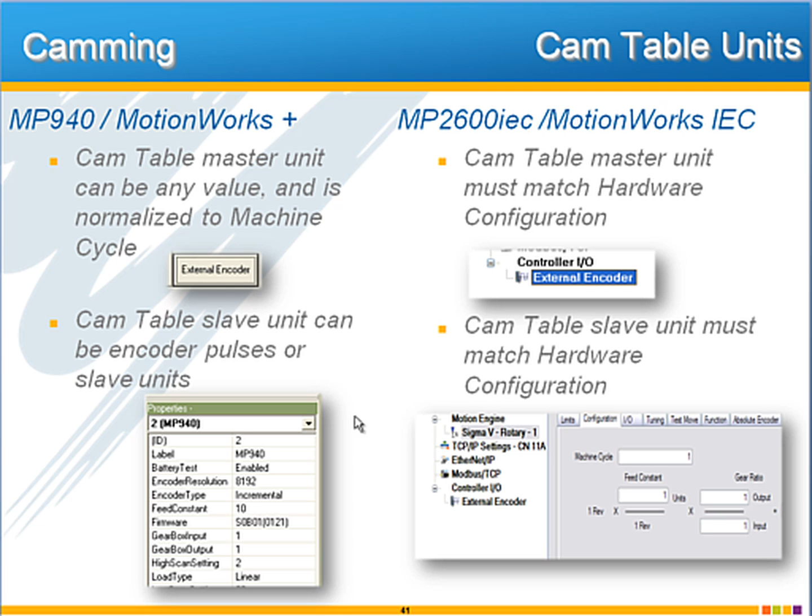So it's possible that your table from MotionWorks Plus is in completely different units than what you need for MotionWorks IEC. And in MotionWorks IEC, we can very confidently use these user units. There's no performance decrease based on any resolution differences like we had in the MP940, because this controller uses 64-bit floating point operations. So how about I explain this again by means of an example.

Let's consider for my example a machine with a rotating shaft, and the controller's job, in this first case the MP940, its job was to move the servo motor in a motion profile path synchronous to this master shaft. In my example, that follows the blue path here, moves it out a bit, pauses and keeps moving out, and then moves back. The total distance is 4 inches out and back. And that has to happen every 450 degrees of this master shaft, so a little bit more than a complete revolution. Every 450 degrees, you can see that the master shaft here in red goes back to position 0.

Let's show a little more detail here about this machine. You can see that in this case, to get this master shaft rotation information into the controller, we use an encoder. This is an encoder with 400 pulses per revolution, not too much, but it is on an induction motor through a ring kit, driving a 4-to-1 gearbox, so that the master shaft here has an effective 1600 pulses per rev from the encoder because it's running through this gearbox.

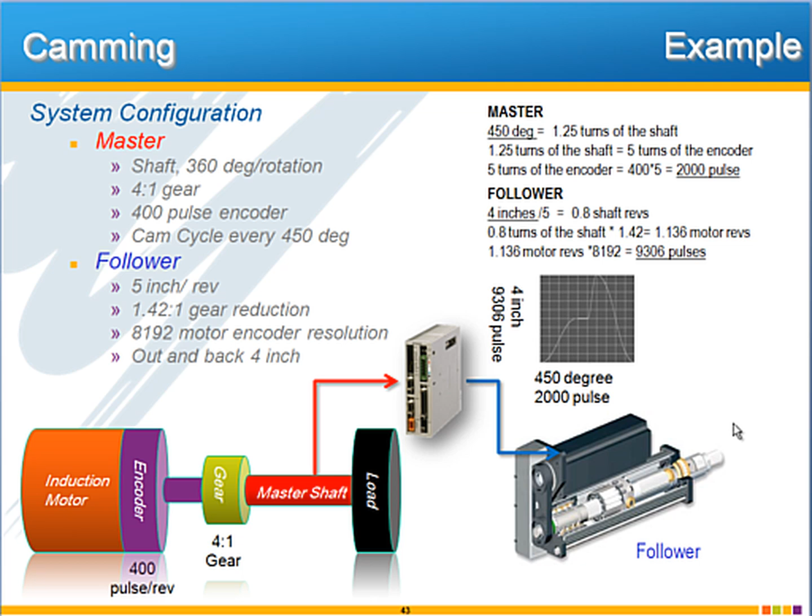The configuration settings can and should be verified as we discussed earlier, and you'd want to set those in the hardware configuration. So let me just verify here in this example. I have configured the external encoder as load type rotary with a feed constant of 360 degrees, that's 360 degrees per load shaft revolution. The machine cycle is set to 450 degrees, outlined in red. And the encoder resolution, outlined in purple, is 400.

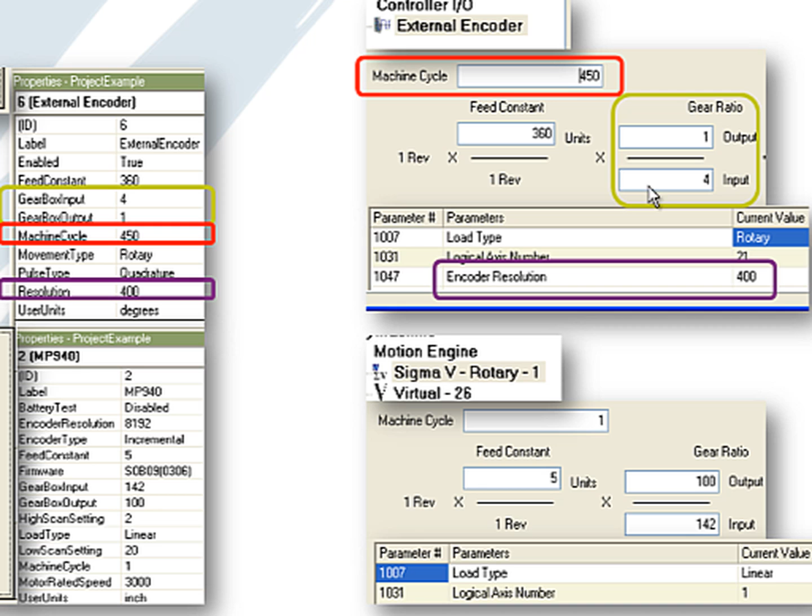And the gearbox is 4-to-1, input to output 4-to-1. Also, if we look at the follower, which in the MP940 system shows that the feed constant is 5, and the gear ratio here, input to output, is 142 to 100. It's 1.42 to 1. Same thing here, 142 to 100, feed constant of 5.

And since this is a load type linear on both of these, the machine cycle doesn't really matter. It's only for rotary applications that even need machine cycle.

The next step then is to open CamTool and find the CamTool file. So in CamTool, I have my project file name here. It's going to be inside the project folder, and you'll want to look for file type CDD. This is the name of my file.

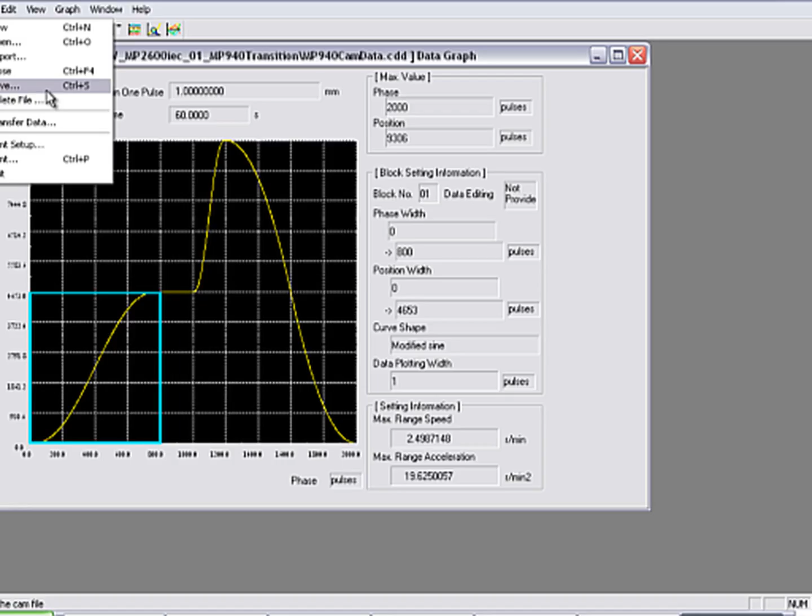Good practice, whenever you are going to make changes to a file, you want to save it as a new name. I'll call it MP26 underscore IEC. You can save it in the same folder, it doesn't really matter. You'll save position data. And it's good practice to use an 8-character file name for both the CDD file and the CSV file. The CSV file has an 8-character limit for sending to the controller.

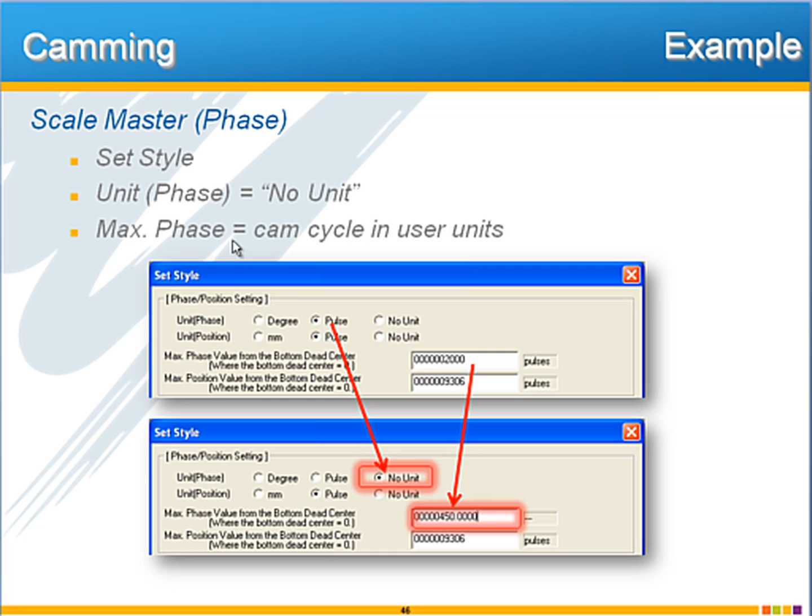So once this CAM file is open, now you need to go to the set style and check out the unit of the phase, meaning the master, and the maximum. Let's go ahead and look at that. So we go to the graph menu, set style. I can tell right away that the master cycle is set for 2000.

Not only does it say pulses, I know it's 2000 because it doesn't make any sense for that to be 2000 degrees, would be my other option. So the number I wanted here was 450 degrees. So I'll select no unit and 450 degrees. Now don't select degrees, that will limit you to 360 for the max phase. So set no unit and 450, which in my example is the maximum.

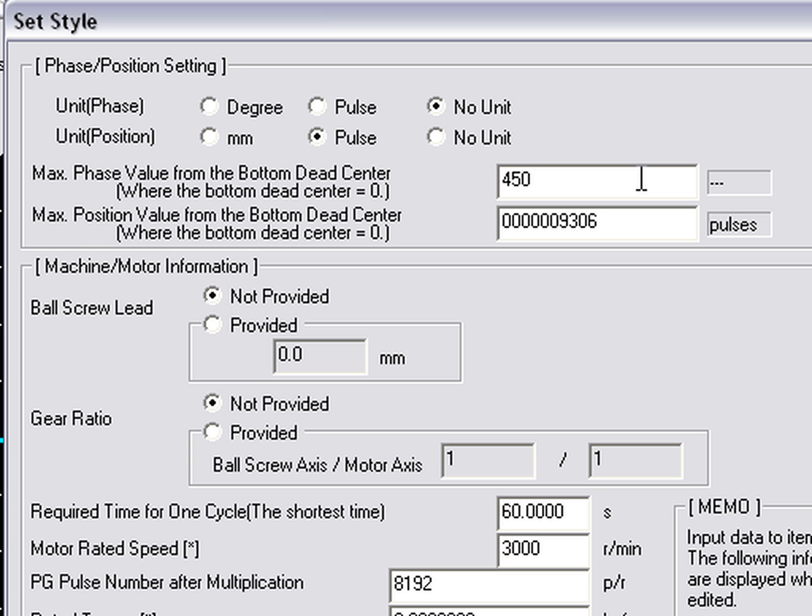On this same page, you want to look at the unit for the slave. It should also be set to no unit, and then instead of pulses, put in the maximum for the slave. So here I am, I see I've got the 9306. That's obviously not inches, plus it says pulses. I'll go to no unit and type in the 4 inches, which was the maximum out.

Now it may be that you already have this value in inches, and if that was true in MotionWorks Plus, then you would also have had this ball screw and gear ratio information plotted out. MotionWorks Plus was able to use that information to basically calculate the pulses in the end anyway. So it's possible that you did have this position also in inches. However, it's probably more likely that you have it in pulses directly.

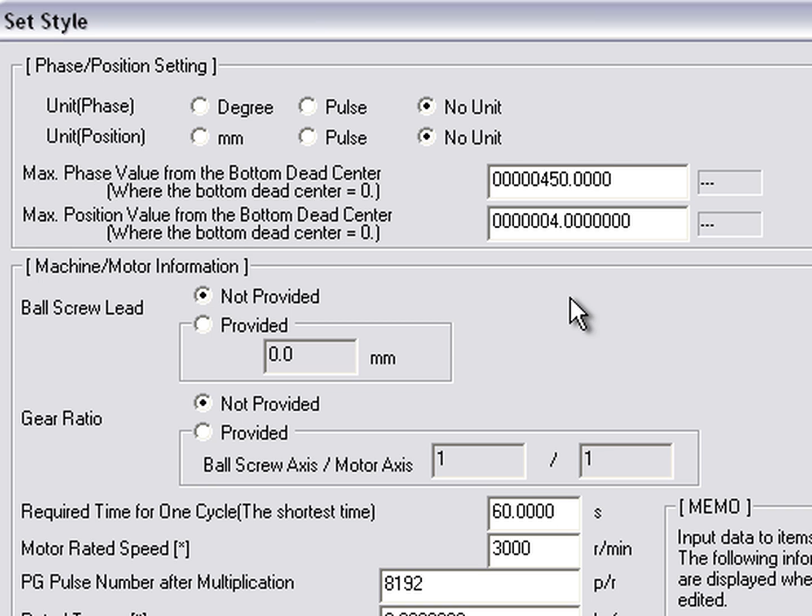And then you click OK to renew the data. Now when I accept these changes, you can see the graph data is kind of gone. So now in set parameter, you'll have to also possibly scale the endpoints of the cam profile back from pulses to inches. And so from the graph menu, I'll go to set parameter.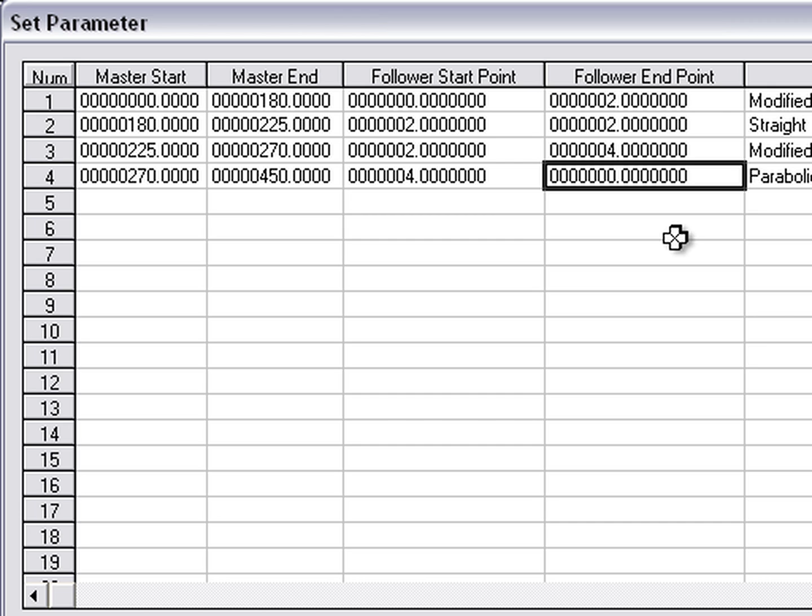And you see here's the different sections of the cam table. I had my follower endpoint set in pulses. So I'll need to have halfway the 2-inch stopping point, and then the final 4-inch maximum out point. Put in 2 and 4 instead of having it in encoder pulses.

I'll just point out this master plotting is automatically recalculated when you change the master cycle from 2000 to 450. So whatever you change it to, you don't have to touch anything with master plotting unless you want to remake the cam table. I just want to have an equivalent cam table with the same number of points. So I'll click OK, renew the data, and you see the graph again.

And on this graph I can verify that I have the position here in inches up to 4 inches. I have the phase here in degrees up to 450 degrees. So that was the last part that we had to do here, was changing the follower endpoints if you had been using the pulses in the set parameter screen.

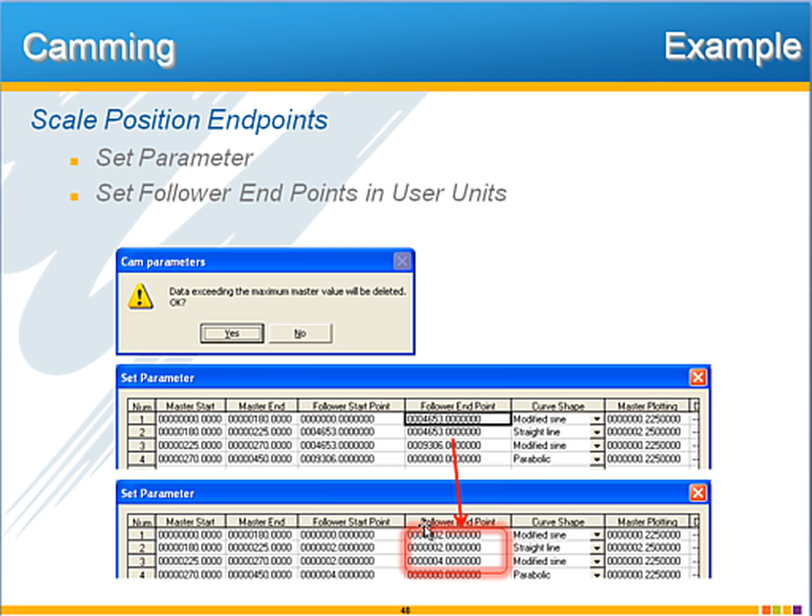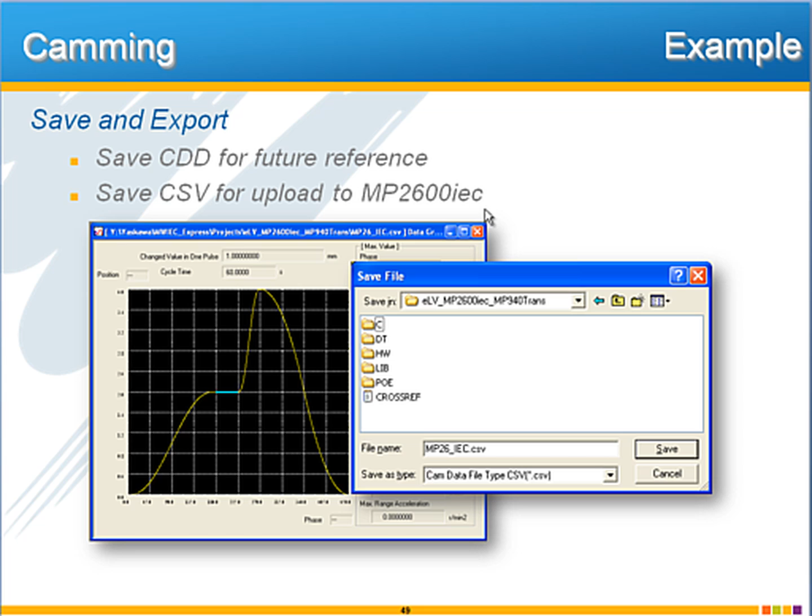So now finally in CamTool I just have to save the file. We recommend you save the CDD just for future reference if you need to pull it up again, and then also save the CSV file. That's the one you need to upload into the controller. So let's do File, Save, and it's already in there. Just hit Save again, save over, and then File, Save again, this time save as CSV file, and I just keep the same name.

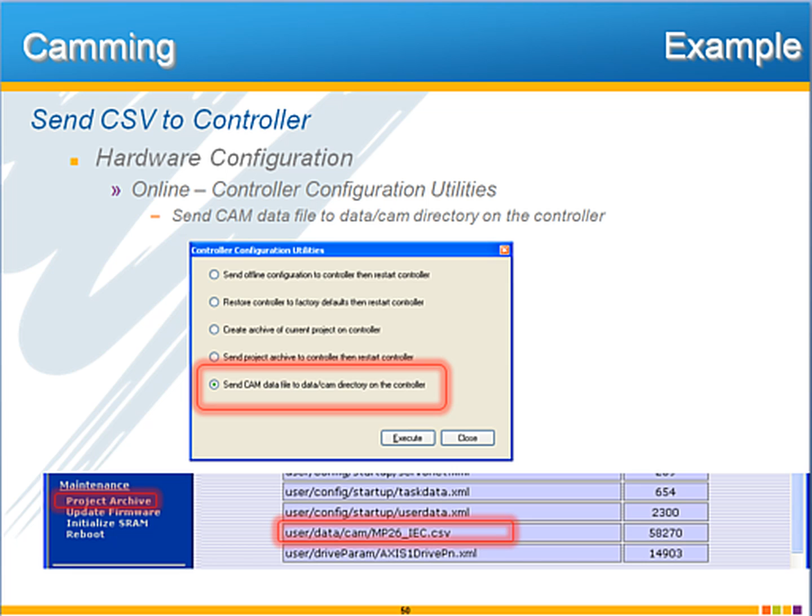Save the position data always. Now, just to finish up this example, we'll go to the hardware configuration and send the CSV file to the controller. One thing I like to do is, even in the controller web page, you can see whether that file's in the controller or not by looking at the project archive.

You have to log in as admin. Look at project archive, and you can see the list of files. I don't have any CSV file in this list right now. I'll go over to the hardware configuration, and under the online menu, controller configuration utilities, you can send the cam data to the cam directory. Click execute and then find the file.

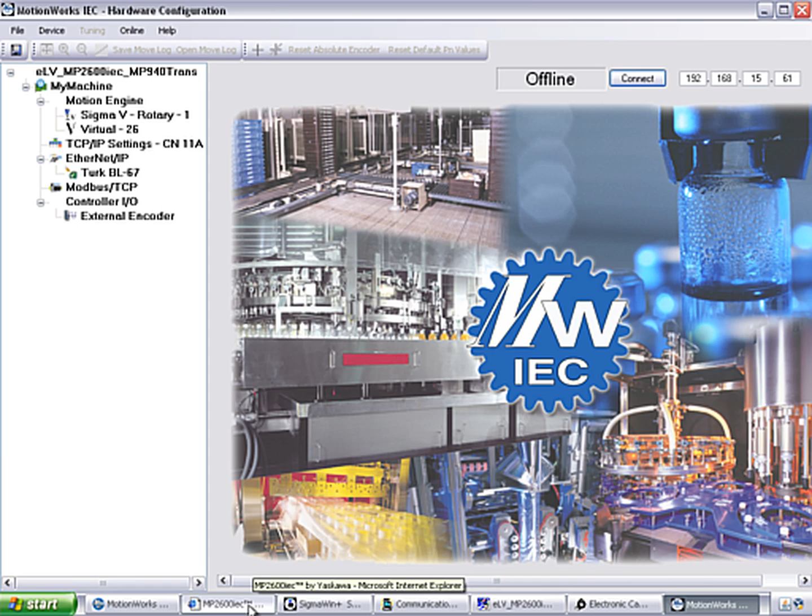There it is, the one that I just made. Open it. Now that it's finished, I can go check and see if that made it to the controller by refreshing. Hit project archive again, and there it is. The CSV file is in the project archive. I usually even highlight that part and copy it, as I'll need it in the code itself.

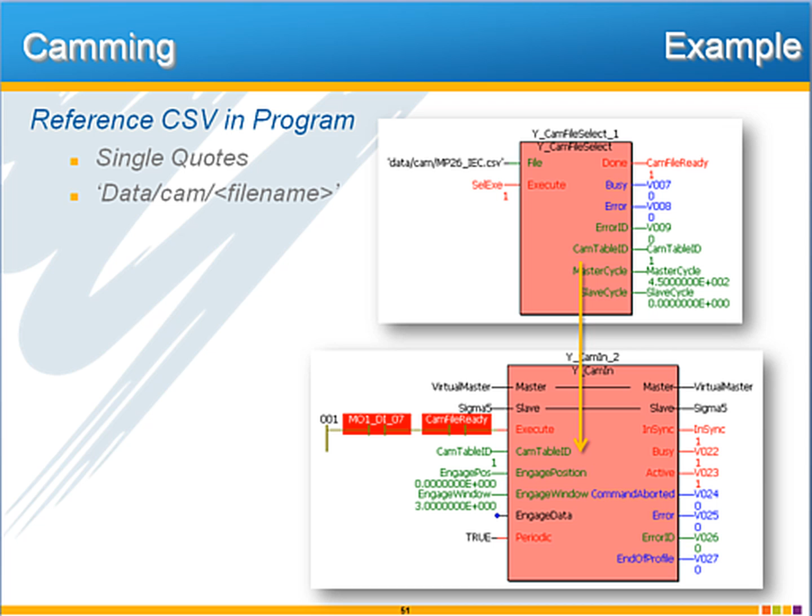So once that file's in the controller, you simply reference the file name and path in single quotes and feed that into the cam file select block. I'll go now and do that here. Double click on file, basically just paste in what I had from the web page. And if I put it in quotes, then that's fixed, single quote.

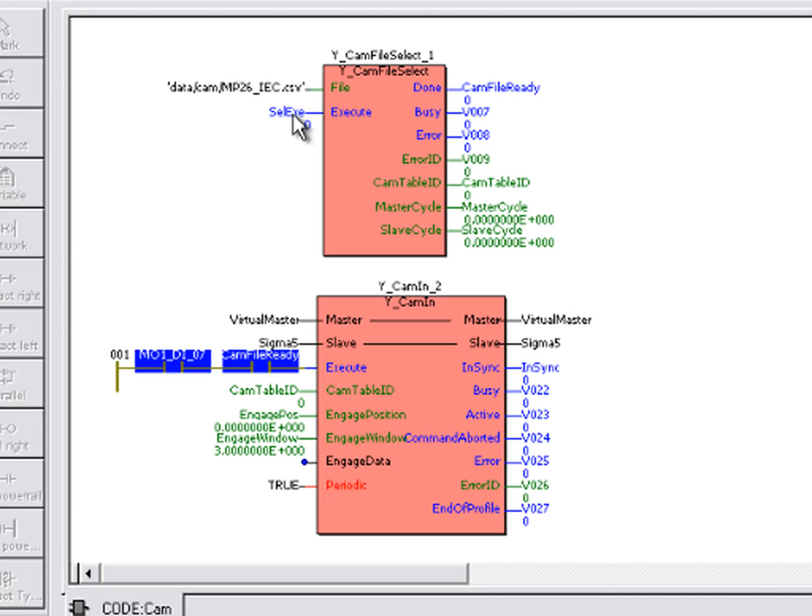So now if I make and run this, okay, I'll download it and run it. Then I can see in debug mode that if I execute cam file select, it's done. It gives a cam table ID of 1. That sends that down here to the cam in block. And all I need now is input 7 to execute cam in.

By setting it up this way, we're able to have different cam files selected. All you need to do is tell this cam in block which cam table ID to use, and it will automatically, basically on the fly, choose between any different cam tables that you want or that have been selected with cam file select. So very powerful camming in the IEC environment.

For the final section of this training on networking, I'll talk about converting the 3 communication options of the MP940, which are serial, Mechatrolink, and DeviceNet. The MP940 used the network technology of its day with 2 serial ports and a network option of either Mechatrolink or DeviceNet, which could function as either master or slave.

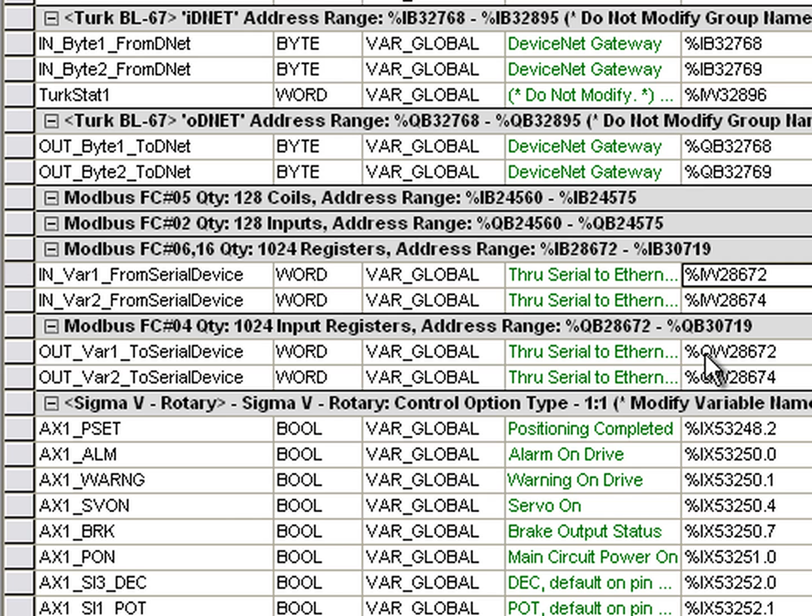In this solution you are adding another hardware device to the system, and that device requires its own configuration. One example shown here is the Digi One IAP serial to Ethernet converter. We've tested it here at Yaskawa and documented an example of how to configure it to work with a Red Lion HMI, referenced by this document number.

MP940 applications frequently used Mechatrolink to network multiple controllers together, or may have had network I/O modules for I/O expansion. We have several solutions for moving from MP940 Mechatrolink networked axes or networked I/O.

Multiple MP2600iec controllers can be networked together over Ethernet IP or Modbus TCP, each with their own program, just like the MP940 controllers are networked over Mechatrolink.

Now, if it's a true multi-axis application, you might want to consider using one of the multi-axis IEC controllers, so that you have one program controlling several axes, in this case over Mechatrolink 2.

These multi-axis controllers also have additional slots for I/O expansion, and they support Mechatrolink 2 I/O, such as the 64-point I/O modules. For expanding I/O, all of the IEC controllers support Ethernet IP or Modbus TCP, so you could replace those devices with Ethernet IP or Modbus TCP I/O devices instead of Mechatrolink.

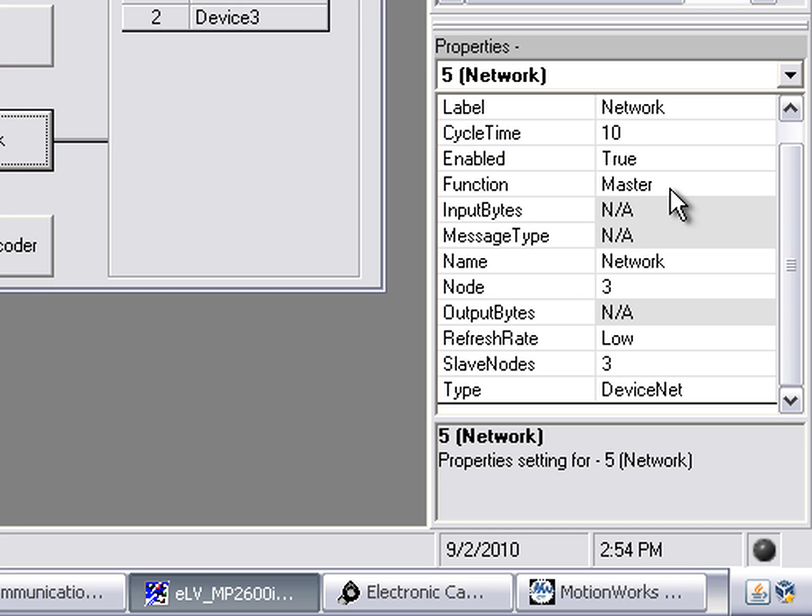If in your project you look at the system properties and you have the network configured as a DeviceNet master with any number of nodes connected to the network, then you've got the DeviceNet option configured as a scanner.

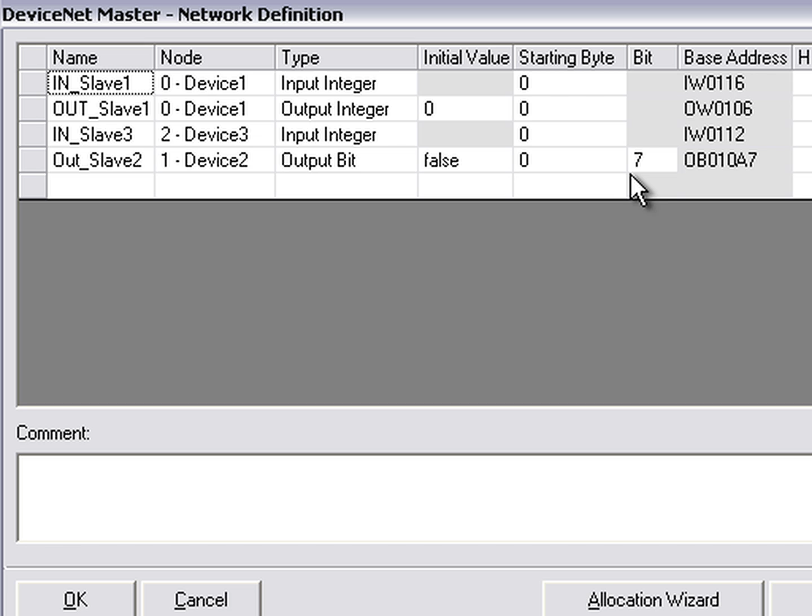Now you would have also had in MotionWorks Plus network data. So under the data network you would have had some number of bytes in and bytes out for each node of different data types, perhaps even single bits coming in and out of each node.

To put an MP2600iec as the scanner on a DeviceNet network means you need an additional device called a DeviceNet master gateway so that you can convert the network variable data from Ethernet IP to DeviceNet. This gateway acts as a DeviceNet master or scanner, but then it's a slave device to the MP2600iec over Ethernet IP.

Similar to the serial to Ethernet converter, the DeviceNet master gateway requires a few steps. You'd have to configure the gateway using the manufacturer's instructions, then configure the controller to add this gateway as an Ethernet IP device in the hardware configuration, and finally add global variables.

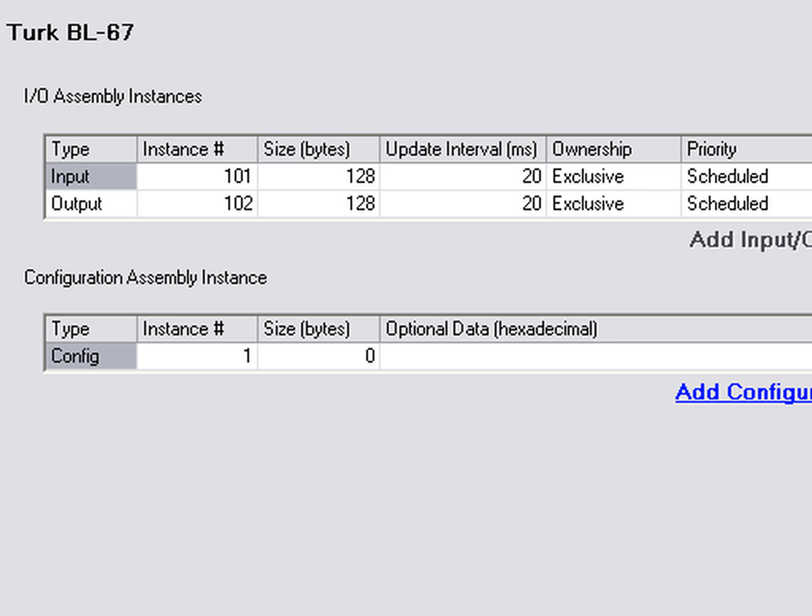Here under Ethernet IP, I've added the device, in this case the Turk BL67, and looking at the details you can see the different settings. This Turk BL67 is the master of DeviceNet, and it's going to be feeding me information here through this area.

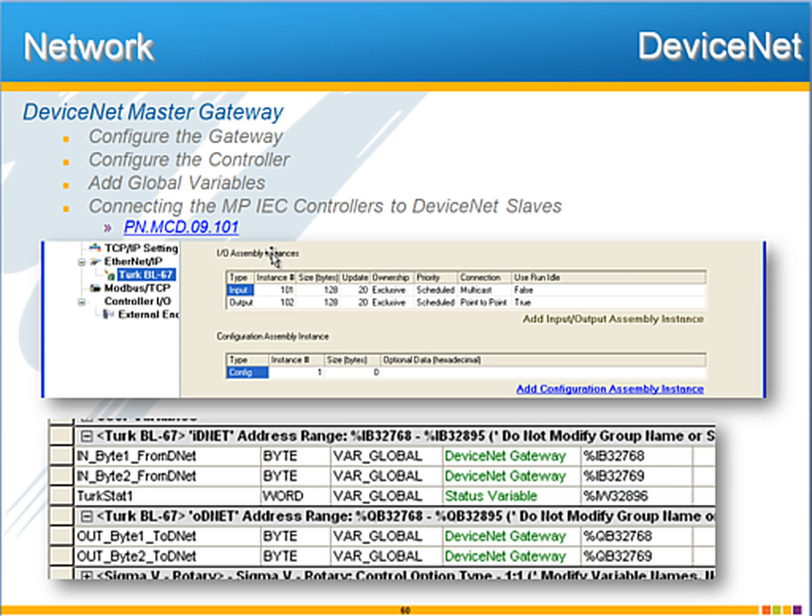If I go now to the global variables area, you can see I've got a group that was created when I saved that configuration, giving me an address range at which I can create variables here in Ethernet IP, MotionWorks IEC land, to be sent over DeviceNet through that gateway. We have done this, and the steps are outlined in the document Connecting the MP IEC Controllers to DeviceNet Slaves. This concludes the e-learning video.